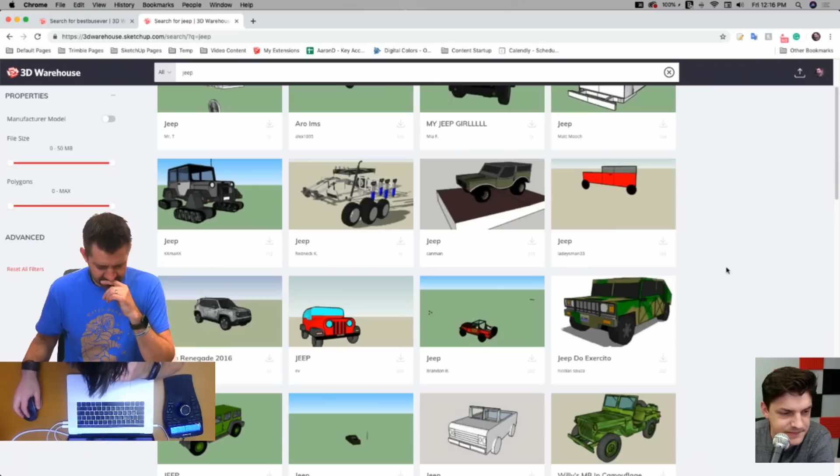But yeah, some cool stuff here - there's a Jeep with some treads on it, that's fun. And we've got this kit of additional parts here, that's pretty sweet. I'm 90% sure this is a Hummer and not a Jeep, but oh, see, the Renegade made the list. Oh, nice.

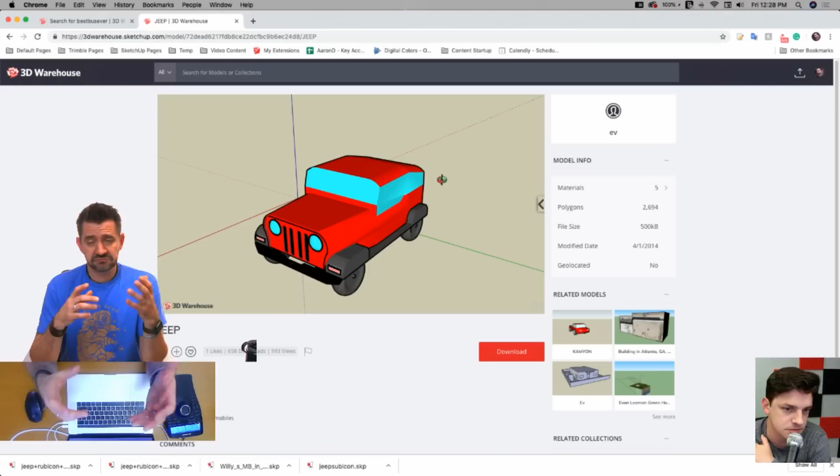A lot of times people use 3D Warehouse to house their own models and pull them in. If you're doing that, then that's great, you don't have to worry about it, go ahead and pull it in. If you don't know a model, don't take a strange model home without doing your proper investigative work. That would be irresponsible.

All right, so we're already started, Mark. Come on, man. Sorry guys, he's behind the times. Oh, I didn't even put it on the right layer. Oh man.

Sorry, I tried to make a really nice little template here that I could just use all the time, and it's not working out. Nope. All right, well let me save this as the template again. Boom, saved. All right, now that we've done that...

Let's go ahead and do File, Import. Should be that most recent file. I want to import the SKP file.

All right, so first impression, it looks like it's pretty close to proper scale, so that's a plus. That's one of the things that's hard to gauge on 3D Warehouse, because the image you first get is depending on how the model's saved. So if I was to go to File, Save right now, my 3D and upload this to 3D Warehouse...

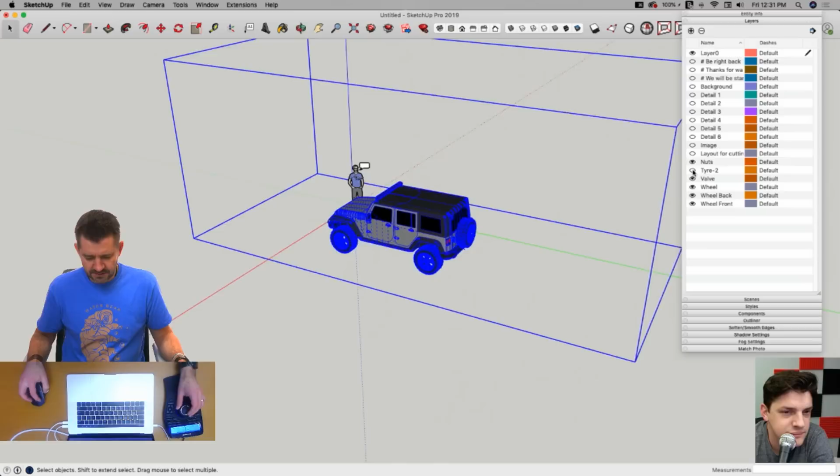But look at all these things, so we're just gonna start taking inventory here. I'm gonna turn my hidden off temporarily, and let's see what happens if I turn on tire 2. Ooh, you see that? A little girth. Oh, well, not really girth. I'm thinking maybe those are the stock tires that actually line up with, I bet these.

Well, it certainly happens when you get stuff off the warehouse. That's right, this is a perfect example of exactly what I'm talking about. All right, so here I got a thing. Gosh, so this is on layer 0. I'm just going to temporarily move it out of the way and turn on that tire 2 layer. Oh no, that's in the same group? Oh, you're killing me. I can't complain, this is why we're doing this. This is straight up like exactly why we're talking about this stuff.

So we do have some things published out there, which are guides to what's the best way to prepare a model for 3D Warehouse. We talk about things like, don't nest things 6 layers deep. All geometry should be on layer 0, everything else should be on named layers, so it's real easy to turn them off. This one already has some weird nesting going on. So this is an example of the kind of stuff you're going to run into if you use 3D Warehouse, which is good. Like I said, this is kind of what I was asking for, right?

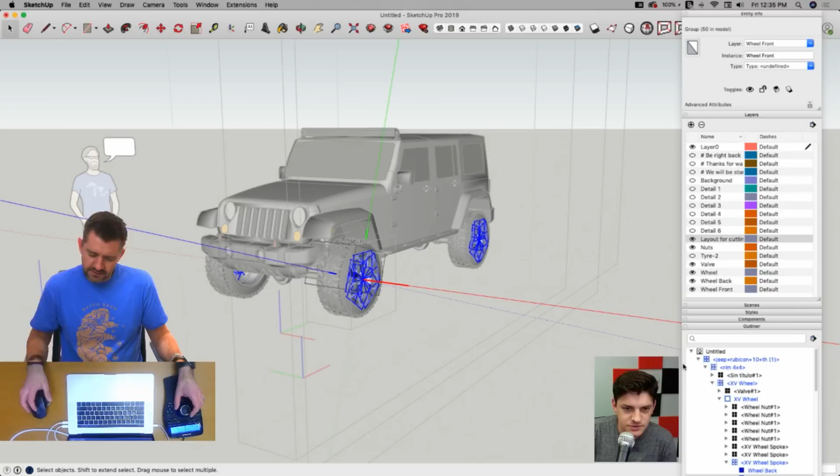Outliner is huge because it's really easy. I mean, even just right there, you saw we just jumped through so many different groups. It's just a group and a group and a group and a group. So what I can do here is when I have something selected, Outliner is going to show me, okay, this is wheel front, which is in the XV wheel spoke, which is in the XV wheel group, which is in the XV wheel group, which is in the rim 4x4. So yeah, this thing is deep.

So one of the things, at this point we're just doing evaluation, we're not even thinking about 3D printing right now. I'm just trying to find where everything is in this model. One of the things I want to think about in the back of my head is what I want to end up with is a single solid, right? I want to have one piece that is one massive solid that I can just send to a printer. When I think about doing that, I have to think about things like this.

Is this rim the amount of detail on a print? So I'm thinking this Jeep's going to be, you know, maybe that big, so that means the wheel's going to be about that big, which means this hub's going to be about this big. So when I'm going this big, how much detail do I need to put in there? Am I going to actually have these thin walls like this, or am I going to just bulk this out and leave these indents in a solid piece inside the wheel? Probably that second one. But again, still evaluating, still looking at stuff.

See what's on detail 6, detail 5, 3, 2, 1. Wow, found something. I don't want to say he varied from the drawings, but... is that a Subaru? It's not a, it's a 2013 Crosstrek.

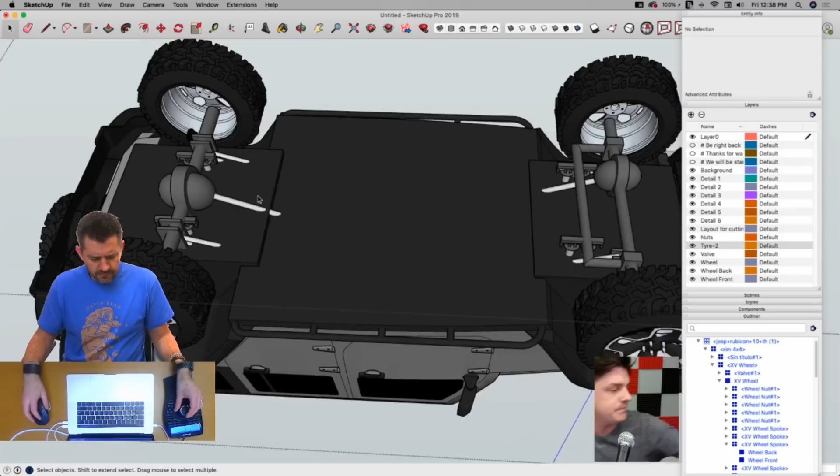All right, so we're back to this. We will have to do some work in here as far as getting the axles lined up with where the tires actually are. I'm going to say where the tires are is where I want to keep them. So we're going to grab this whole mess here and just slide it into place. Same thing in the back, we'll grab this and scoot it back. And then talk about what kind of work we got to do to make that printable.

We don't need all these layers. I feel better about the stuff we have cleaned up. I am going to take a look at my outliner though and see if I have anything that's turned off right now that I'm not seeing.

Looks like when something is hidden, so when I hide a thing, go ahead and hide this temporarily. See how it looks in my outliner? It's paler, grayed out. So if I see anything like that, then I know I want to go in there and unhide it. So as I'm coming through here, I'm seeing everything, and it looks like, for the most part, those are all the same.

Wheel nut. It looks like I'm looking at everything that's in this model right now. It's amazing how many layers and everything are dedicated to, oh, there's the lift kit. Yeah, so that was pulled off of something else also. And our actual Jeep, there's our Jeep, we found it. So the front end there is a separate one, and then the Jeep here.

That's your Jeep Wrangler Unlimited stock. Darn right it is. All right, so it's modeled as half, which is something we've talked about in here. This is a symmetric vehicle, so it was modeled in a single half. Yeah, so that's pretty sweet. Yes, we can work from this. We're gonna do some work.

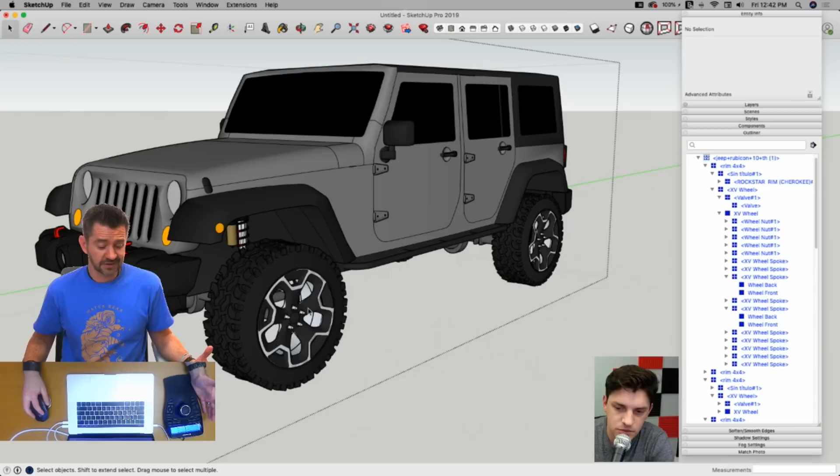Oh, for sure, yeah, I mean that absolutely. This could be broken down if I want. I could chop the Jeep into pieces and then print them as big as I could get on the bed. That's absolutely possible too, yeah for sure. I'm choosing to come up with a single solid from this disintegrated model because I want to show you guys some tips on how to do that.

But yeah, you can break down as much or as little as you want as far as that goes. All right, so what I'm going to do right now, there's a couple things with this wheel and tire that I'm going to do. I want to make it one solid piece with as much detail as I can spare, but keeping it printable.

The last thing I want to do with something like this is end up with a hollow cavity, which a wheel primarily is. It's a big hole where the brakes, wheel drum, and all that stuff go. But I don't want that. I want that to be one big solid piece. I don't want to have to come in and break out support material.

If I was printing it in pieces like you're asking, I could probably just throw this on the printer flat and let it build up underneath. That would be fine, but since I'm going for a monolithic model, I want all of this to be one piece. So I'm going to keep drilling down into this model.

If I click in deeper, the tire goes away, and now I just have this piece. In here, if I click in, okay, all of this section was made in small sections. So this is one section that's then repeated all the way around. Cool, we can work with this.

And then it looks like these guys are separate pieces. We can work with that too. And I also saw something else out here, I can delete that. I'm okay with that, I'm okay losing that level of detail. I think that was like the little error thing, right?

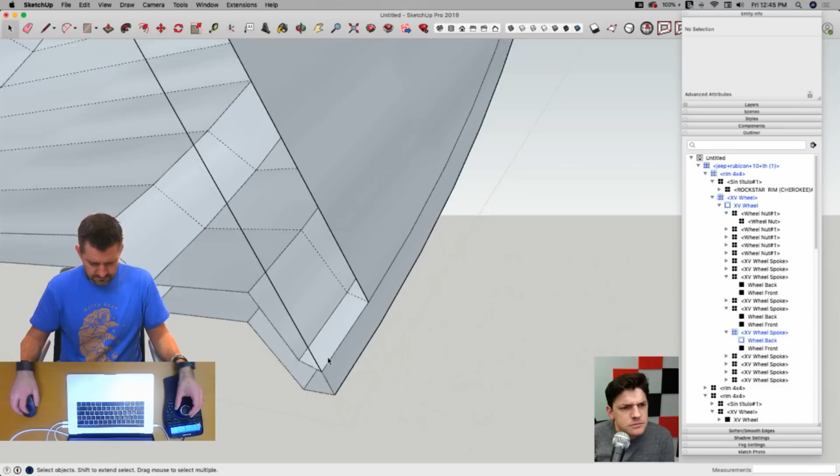I'm going to again work with what I got. I'm going to do this. Look at what's here, all right, I'm just curious. Did I misclick that? Or is that last triangle just... okay, there we go. No, something's not right.

Odd. Oh, there we go. All right, so there is, how about that? Oh yeah, oh look at that. It's so nice when things line up. It's just so pleasant, and I'm so happy about this.

I'm getting rid of the hidden geometry. You guys probably know, when you go to 3D print something, hidden doesn't matter, that basically doesn't exist is really what happens. Hidden geometry is not a thing once you get into printing. It's just geometry, just surfaces, excuse me, is the only thing we're worried about. All right, so that kind of makes...

This whole section, oh, it's connected by one line there. Oh, what's also connected? Oh, right there. I just have to do something. I'm gonna have to explode these two to join them together to get in here to close this up, because this front actually ties back in with this piece.

All right, so I want this whole wedge to just be one big closed piece. So I'm actually gonna go to the outside with this. Ooh, something else closed up. Love it. That's the circle, that thing, that's the thing. It's amazing how often the term 'thing' is the thing to say.

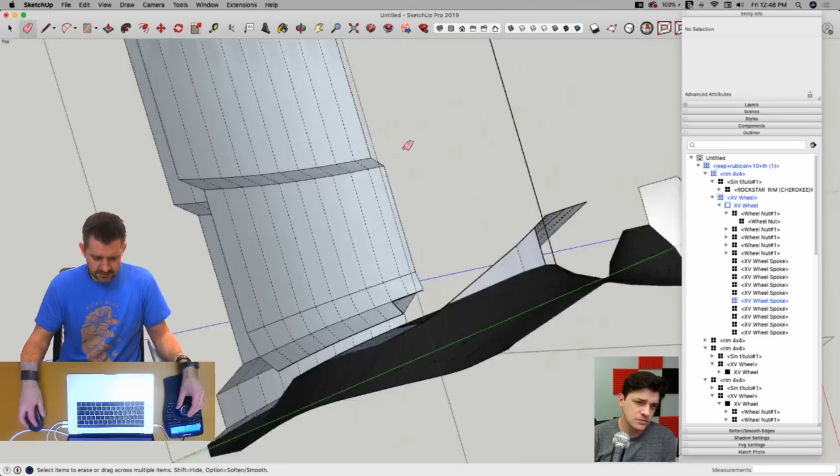Now those little lines connecting things together. All right, getting there. Right here, this big cavity, I'm going to get rid of these pieces that connect it to the back. I actually don't need this whole middle part because that's not going to exist, since that's part of the inside.

So I do want to keep this. I like this relief that goes back in here. So what I might do is pull this straight back, and then pull this parallel to this straight line back here.

I'm trying to figure out how to do some of this stuff as we go. So this is going to come back. I'm going to work plane back here. What I want this to do is go in somewhat - I don't need it to be a full cavity, I don't need it to go all the way back, but I do want a little bit of relief in there. Maybe not even that much. Maybe I'll pull that forward more, like that.

Yes, I am happy with this. Okay, this pleases me. This pleases me greatly.

All right, so I'm going to go perpendicular to this line. I'm just going to take...

Wait a minute, who hasn't told me to save yet? I'm looking, I don't see any saves anywhere in the comments. That's why I come to you guys. Okay, I'm good now.

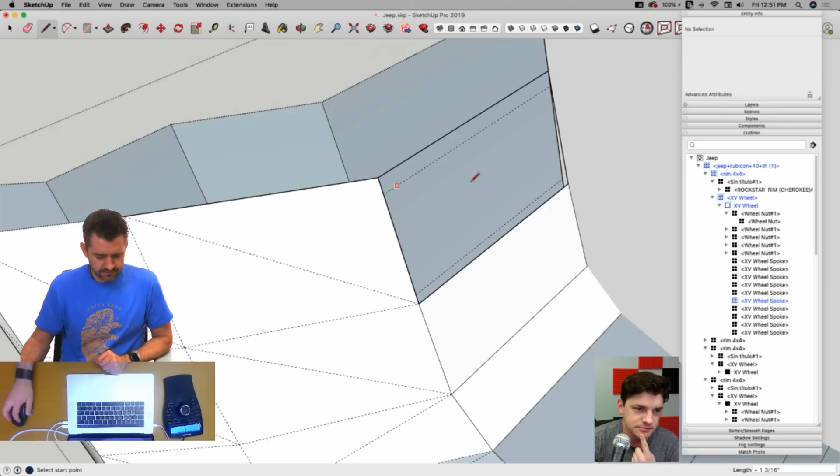and be done. It's amazing how - I don't know if it's just me, let me know if you guys have done this too - where you get into a detail and you're just beating your head against the wall trying to make something line up, trying to make something fit, and I'm like, oh, I could delete that line and redraw it, and the whole thing works again.

Couple seconds. So yeah, there's a point where you decide this is my model, and I'm not worried about staying true to the original lines. It doesn't matter, there's a point at which it just stops mattering. So get to that point as quick as possible, because it's going to save you time when you're in a situation like that where you're trying to make everything line up perfectly.

You're not worried about artist's intent, the original modeler's - you're not restoring their model, you're making it your own. I'm using their initial work as inspiration for my own final whatever. It's like a sample - exactly. Yeah, I'm respecting where it came from. I think it's awesome that whoever modeled this did this, but yeah, I'm not going to be hung up on keeping every piece of line work they had if it doesn't serve my purpose anymore.

All right, so now I'm going to run down here and just delete everything that's on the other side of this line because I don't need it.

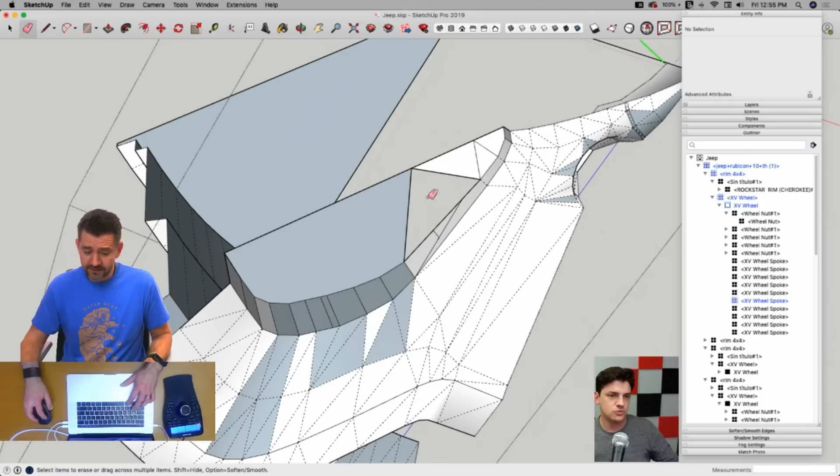All right, I'm not quite sure what's happening here. I'm gonna use vertex tools right now and make this planar. Maybe leave these lines out. No, what is? Oh, you're planar now. You can't argue with me. Oh, there we go, we're closer.

Okay, that's odd. That tells me something's broken in my geometry, most likely. But again, guess what? I'm at the point where I'm good with this. I don't care anymore. No, that sounds wrong - that's not the way it was supposed to come out. This is good enough considering this detail will be this big on my print. I don't care about getting that perfect. That is good enough.

Steven asks if reversed faces can affect geometry. Depending on what you're doing, they may or may not matter.

For this example, Aaron's preparing it for 3D printing, and the outside face and inside face will matter for printing, because if you want to have one solid that has an outside and an inside, each face has to be oriented correctly in order for that to work. Rendering is also where people run into problems with reversed faces. So sometimes it doesn't matter, but it's good modeling practice to keep whatever's inside facing inside and whatever's outside facing outside.

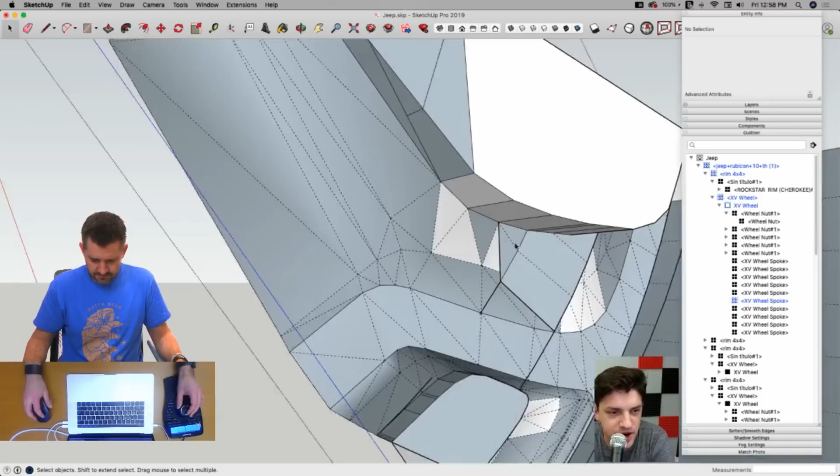Oh, speaking of - well, not speaking of - but since you're using the eraser and dragging over stuff, that skill builder you made earlier this week using the eraser as a select, that was cool. I haven't ever thought of that, but I gotta give credit - I don't know if he's on here, but forum user Mike Wazowski, aka Jack de Moel, that was his idea. We had a little thing on the forum where we asked people to tell us their skill builders, and when they did, we made them into videos.

I gotta look happy there. That one's not me. And that was one of the ones that somebody came up with, and that was cool. I mean, once you do it, it makes total sense. But it's always interesting - not going through the full process of it. It's kind of like starting to draw a line, orbiting, and selecting the endpoint. When you first start modeling, you don't really think of that. But doing stuff in the middle of an operation is clever. It is, that's good stuff.

I got hello from Russia. Hello, and Florida - hello down in Florida and over in Russia.

What are you modeling? Aaron's modeling a Jeep. What kind of Jeep is it? Wrangler something, Rubicon? Is that right? It's a Jeep, it's a Jeep, for 3D printing. So this is part of the wheel - just doing some cleanup on a model from 3D Warehouse right now, polishing up the rims.

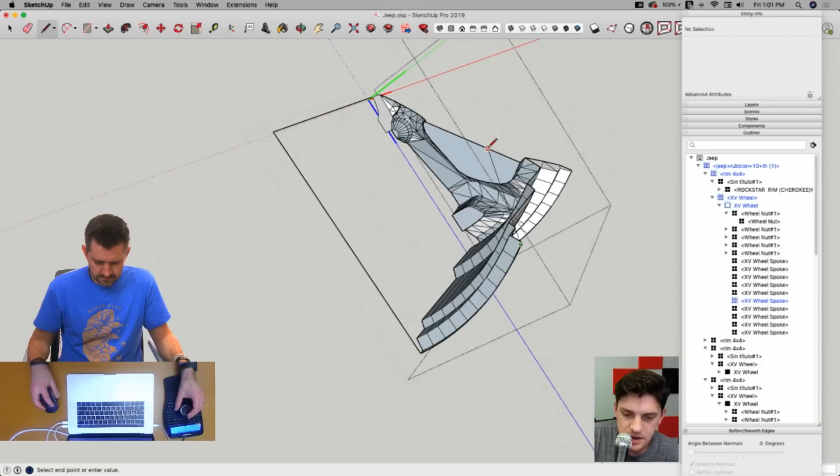And it will be 3D printed in one of the printers we have around the office. I believe the original model was modeled after reference images, at least that we know the wheels were.

So one of the things I run into a lot with models like this is stuff not drawn on axis, where models are put together with a 'that's good enough' mindset, which I get. It's fine the way it looks, but it can be difficult because once I get in here, I want stuff to line up and have everything be nice and clean, and that's not always an option. It's the back of a tire, throw it on, I could probably have that attitude too. I should probably have more of that attitude because there's gonna be a point at which we go, okay, it's good enough, I don't need to go a whole lot further to make it 3D printable. So we'll probably hit that in the not too distant future. But nice.

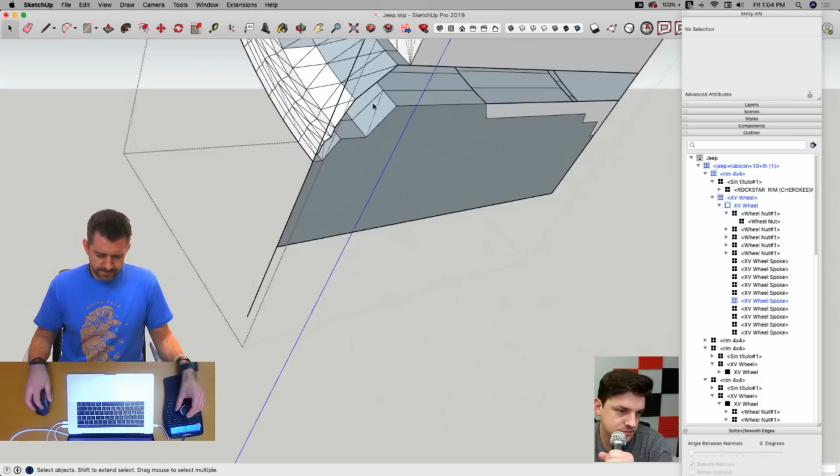I got a couple issues here where I'm just gonna do this. I spent enough time on this wheel, so I'm gonna grab some lines and just pull them through along their original axes here. Actually, I'm not pulling through on their original axes, I'm just off axes. Oh, come on man, see, that's what happens when I talk and do things. Whoa, was there two points there? There it is, so there's some stuff going on, some stuff's happening.

Maybe this was the wrong model to clean up. Well, fortunately, I think that this part of it will be... well, we're gonna see a lot of things here, we're gonna see some things. And then I'm just gonna real quickly connect these together. I thought quickly - no. So there's something going on here with these segments right here.

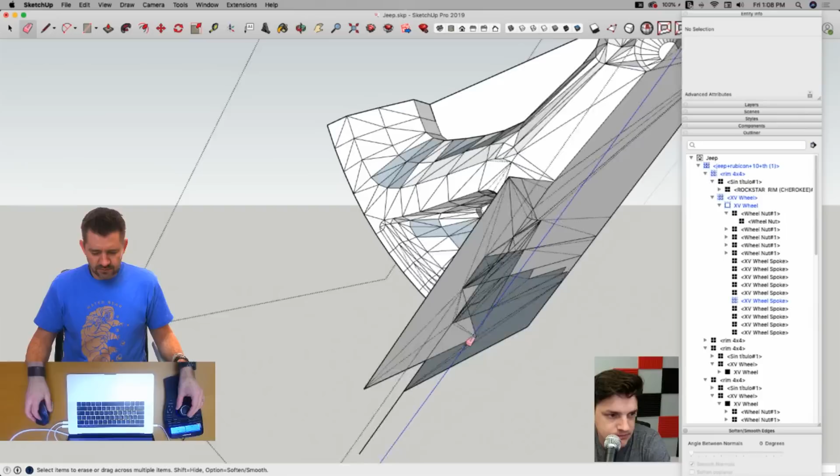Is that what you're talking about? Basically, you could think of it as this: I have a camera on my head and I'm moving around the model. When I get too close, my head pokes through the model. That's called clipping. We do experience an issue with clipping depending on how your model is put together.

If your model is too big, it can cause issues with clipping. That is to say, with an architectural model, if you have stuff miles away from the origin, it can cause issues with clipping. Or if you're dealing with a real small piece of a real big model, that can cause issues with clipping too.

So most times we see that switching between perspective and parallel helps. There's less of an issue with camera in parallel, but, and this is totally subjective, some people really like working in that perspective view. Like you. I like perspective. I struggle with parallel, but I know this about me. That's your call. How you want to do it, that's up to you.

All right, you know what? We're gonna see. I'm gonna just take these real quick, and I'm going to.

Now I'm thinking about this, I'm realizing this matters even less than I originally was thinking, because all of this is on the inside of the actual tire. So, yes, that was a fun exercise in the unnecessary.

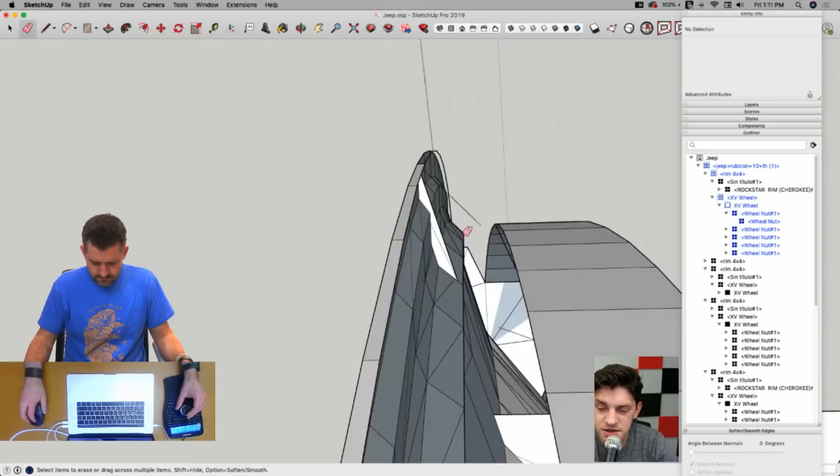I remember when I started using SketchUp a long time ago, and it's still the greatest 3D modeling software. Oh, well, thanks for saying so. I think Aaron and I would heartily agree with you. Biased, but we think our opinion's right, yeah. Yeah, we know it is.

Nicholas says, I love the 3D Connexion Space Mouse Enterprise. And so does Aaron. He's flipping around this wheel smooth as butter. And silk, for that matter.

Oh, we're almost there. Dave says your problem is that you have two eyes and binocular vision — maybe that's why you prefer the parallel. That's probably it. If only I had... what's the alternative? Eye patch? So pirates prefer parallel projection? Is that what I just learned just now? Mm-hmm, that's right, maybe.

I mean, it emulates looking through a... what are those called? You pop them out, you look at the sea, land ho, and all that. Telescope? Yeah, you're looking for a better maritime-sounding word, weren't you? Yeah. Well, para-something? I'm not known for my vocabulary. We call that wording in the business.

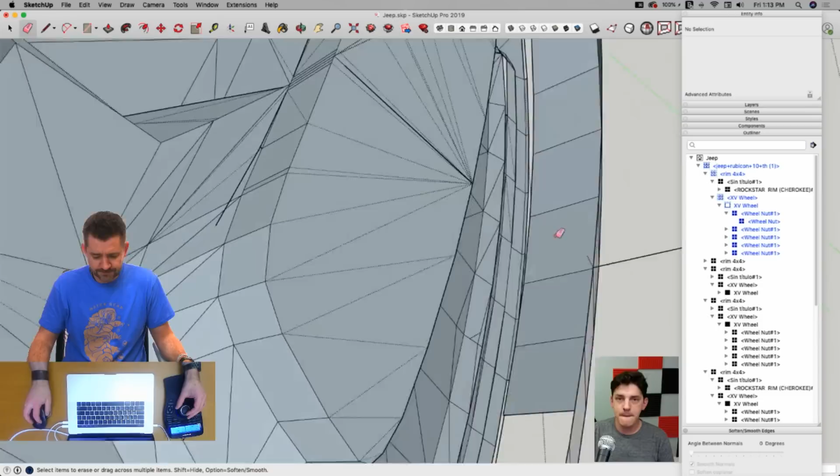And that just has to do with how SketchUp goes about putting geometry on the screen. I don't know how much there is to actually do about that.

Some of it can come down to workflow. One of the things you may want to consider at that point, if you do a lot of that, is actually making those small pieces into components that are separate from the rest of the house. You can work on those in a separate instance, open it up by itself, work on it there, and then drop it back in.

We did a video not too long ago showcasing how to take, in the one we did, an individual room and make changes to it. But same goes for taking a small piece of detail of a larger model, working on it as its own model, and then jumping back in and out. That works with components the same way. So something else to consider if you see that kind of work a lot.

All right, I think I got my hubcap fairly well isolated. It's better, looks killer, I mean, that's... All right, this is the prettiest XV wheel I've ever seen. That's saying a lot, guys.

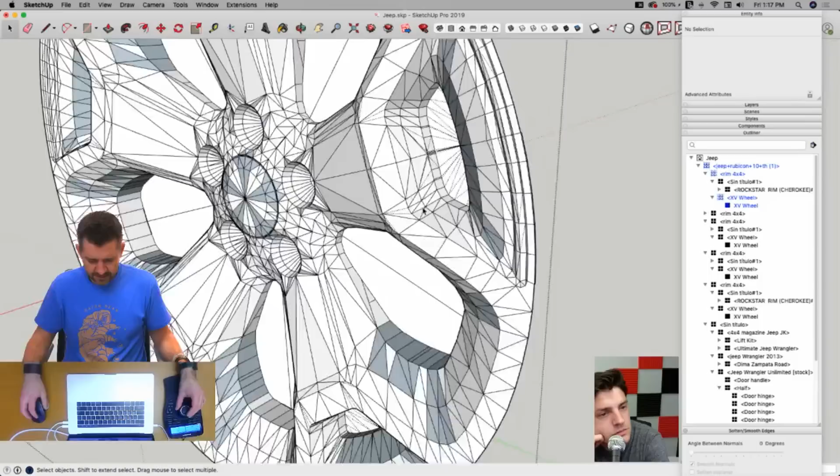What I'm going to do is step out once more. I'm actually going to go into this one. Look at what I got. Oh, look at that, it's not even attempting to be solid. Yes, let's see if I can just close this up with a line.

And this is something you run into in 3D Warehouse a lot. Oh, you know what, all of these different, I believe they're called nubbies, are separate pieces.

Oh boy, all right, so. But it's all, I don't know, I don't know what's going on here.

All right, we're going to explode that, grab all that stuff, we're in as deep as we can go. We're going to say intersect with selection. That should give me these breaks on the outside of those nubby pieces, so that'll actually intersect nicely. That looks good all through there.

Boy, now unfortunately, what I'd have to do is select each of these guys. Oh, this sucks. This is a horrible idea. Whose idea was this? Oh, man. Okay, so honestly, it's probably about... I'm going to spend a minute doing this, but, oops.

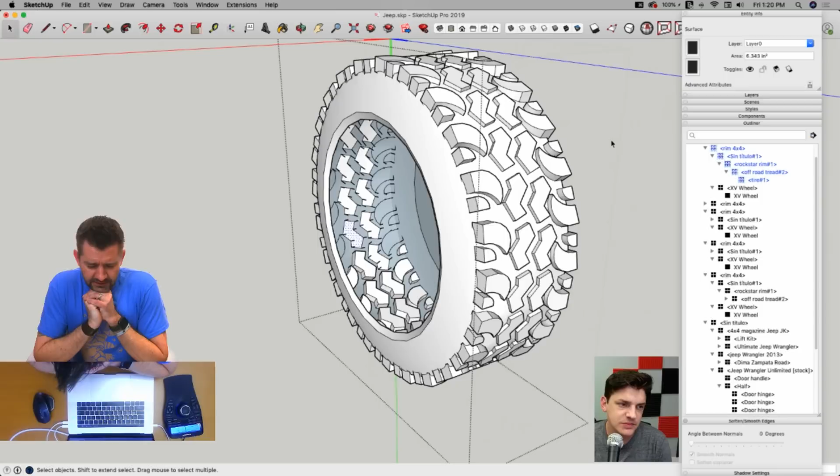Question for y'all. No, it's not a question, I'm not gonna do it. I don't want to spend... the reason I don't want to do - well, now I'm challenging myself. Somebody said you could divide it into 4 pieces, just clean a quarter of it up and then rotate that. Yeah, even less than that. That's great minds think alike.

Is there a pattern to the treads? Yeah, that's what I'm wondering. So if I look right there, that is hitting right there on that corner. So if I go here... Ooh, look at that. That looks like it lines up. Super sweet.

So I'm gonna pull this across like this, bring a line out here like that. I don't know what I just did here. Undo, undo, undo - still one of my favorite modify commands.

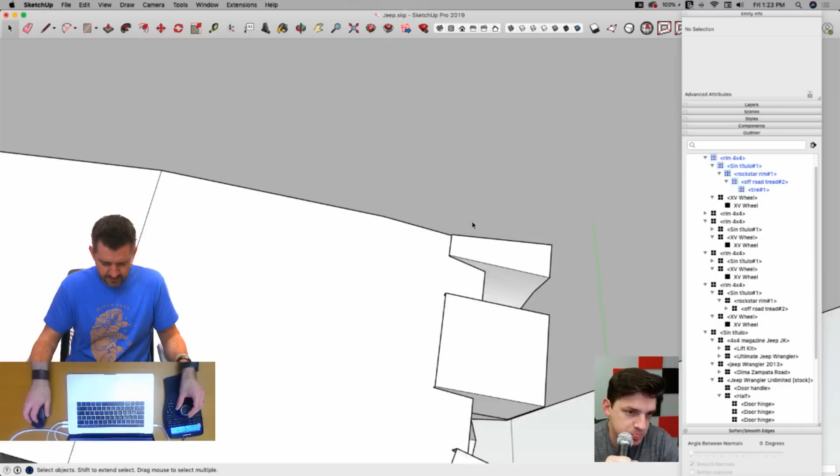Whew, that was clean. All right, so here's one of those spots where we didn't quite close up. Force that - something's not, got a line that's not closing over here.

You guys ever do this? You ever find yourself leaning closer to the screen than you can actually zoom in on? I do this. That's how I know I'm in the zone when I find myself hitting my head against the screen on occasion.

All right, that looks good. It looks like it should close. There we go. Oh, beauty, hey. Oh, look at that, it's all come together. Ah, there, we did it. That's one half. Whew, so happy right now.

Hot dog. Yes, I'll tell you what I had for lunch yesterday - a hot dog, I really did, and a hamburger, wow, not a cheeseburger, with onion and mustard, the ketchup was all gone. Sorry to hear that - that sounds like you were at a way better place yesterday than I was. I was at the Trimble Westminster office. All right, what's going on there? The agriculture division had a meeting and then a barbecue afterwards, and I was invited - I videotaped the meeting, was invited, graciously accepted to the barbecue.

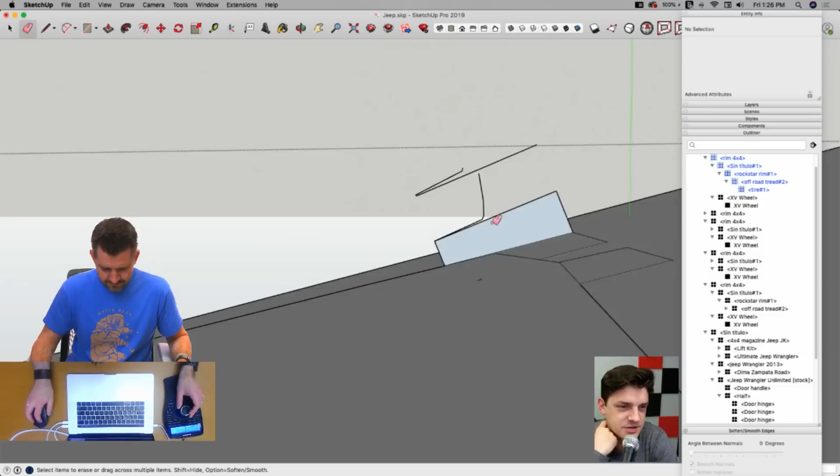Yeah, is it getting worn out? You have to get a new one? Tired, so tired. Remember those gigantic sized erasers, like for really big mistakes? You ever seen those? Yeah, that was quality humor, I don't care what you say. And the big pencils are very funny too. I remember one time my friend broke his wrist, and he used one of those big pencils, and he said it's the only pencil he could write with. That sounds rough, not fun. Yeah, you have to sharpen it with a knife. Not a lot of classrooms have big pencil erasers or big sharpeners.

Have you ever heard of Stabby CAD? Stabby CAD, STABI. Oh yeah, I think I have, I heard someone mention it yesterday in some computer-assisted design context. But I wonder if they have the extra large sharpeners at their office. Can't have stabby hands without a stabby hand. Stabby hands, stabby hands, stabby hands.

All right, I do lean in on the screen, and then I get very angry with myself because I have neck and shoulders like stones. My neck hurts big time, all the time. Stone shoulders and neck, that's a good way of putting it. All right, we did it, I can lean back again. Break those stones up, baby. That's right, crunch, there's definitely crunching noises happening.

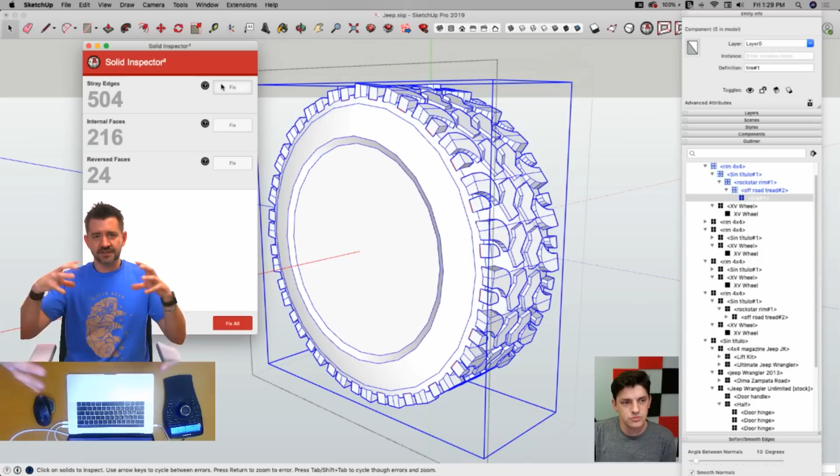I am going to exit out one, grab that group, and run Solid Inspector on it right now. We haven't used Solid Inspector yet, but it's essential. This is why I have a shortcut key assigned to it, or I did, I think I unassigned it because I ran out of room on my shortcuts. But if you're doing this kind of work, Solid Inspector is something you run over and over again as you work, because each level of group we come out to, we want to make sure we're building solid. Then I'm going to grab the hubcap, slap it on here, make sure it's solid, and keep working my way back out to make sure everything is solid.

This got a bunch of options, some stray edges inside. I totally believe that, some internal faces and some reverse faces. I'm just going to say fix all, see what happens. Solid Inspector's happy, yay, SketchUp's happy, it's calling it solid. And of course, don't forget to save.

All right, that looks good, I'm happy with that. So where am I right now? Look how many layers deep this group is. This is the group that actually has the geometry, it's tire number 1. It is in 1, 2, 3, 4, 5 different levels. I don't need 5 levels of wrapper right now. So what I'm going to do is at the second lowest level, I'm going to explode. I'm going to step out another level, and explode again.

All right, so when I come out another level, here's where my two groups are finally meeting. You can see that's inside of another level. Nope, that's the master level, and I'm in here right now with these two. So I'm out now. That's good, I'm in a good place now.

All right, so I'm going to look at this. I'm going to scoot this out temporarily. I'm going to grab this, and oh man, explode again. So much exploding. I'm going to get rid of this face right here. Step back out, grab this, and slide it back.

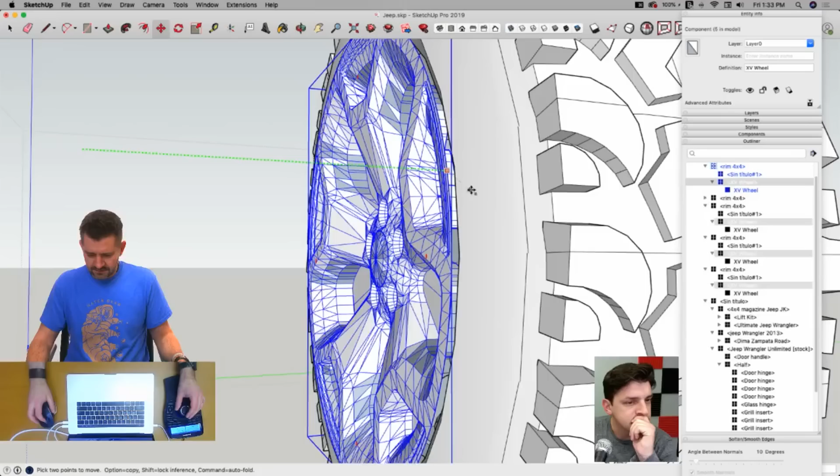And this is an issue that comes up a lot, you guys have probably seen this. Can't quite see where I'm snapping to, and this is where X-ray comes in. I want to snap this into my surface and see it. So that's hitting the face of the tire.

This is an issue that happens all the time, 3D warehouse or not. This hub was made with a different number of segments, it looks like, than the wheel was, so I don't have a clear connection. I don't have just circle slots in a circle where we're good to go. This has more sides than the wheel was made with, so I get this thing where here's my faceted edges of my hub, and here's the big facets of my wheel.

There's not a simple fix for that. I can't just go bump or reduce one or the other. So what I'm going to do in this case is push it back in just enough so that it overlaps completely over the geometry of the hub. See that? Now that's done, so if I look inside here from the back, see that overlap right there? That's what I need, these two pieces overlap each other.

Now I'm going to grab both of them and explode them. Oh, and I got to explode the hub twice because that's still two layers deep. All right, now I'm going to grab everything and right click.

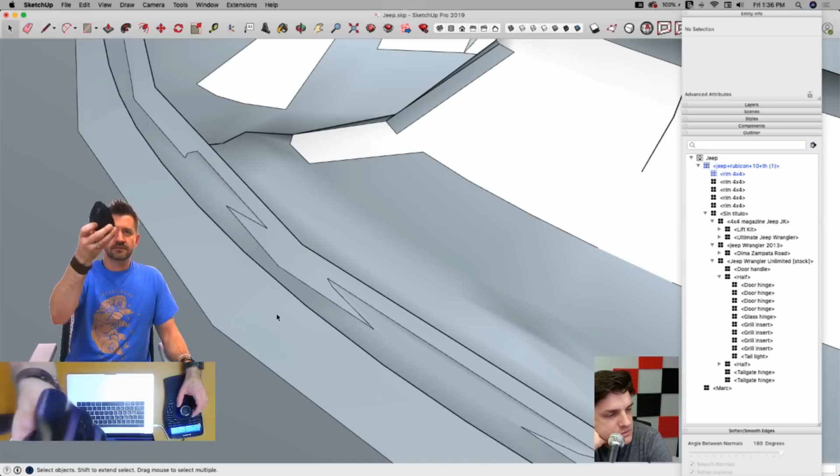Logitech MX Master - the reason I like this is because it has so many programmable buttons. It's got several buttons under the thumb, a couple scroll wheels, and there's actually a button on the thumb pad I can use to assign gestures. My most commonly used drawing commands are activated through my mouse, not through the 3D mouse or shortcuts. I'd recommend spending a bit more money - they're about $100, but you can get them on Amazon for like 60-70. It's worth it, especially if you spend a lot of time. It's a little heavier, a little bigger. Some mice make me scrunch my hand up, getting claw hands to use them, but this fits in my hand pretty well.

It's got Darkfield technology, I think they call it, so this will actually work on a piece of glass, which is pretty cool. I've only had one time where I went to a client to do a demo and they had straight up just a bunch of glass conference tables - everything was glass. Hopefully no stones being thrown.

Shell Raider says, much clickies on the MX Master there. Yes. Do you have assigned shortcuts on the extra buttons on that mouse? It sounds like you do for drawing commands, and also for the 3D mouse - you have shortcuts assigned to those buttons as well, right? Yep, lots of shortcuts.

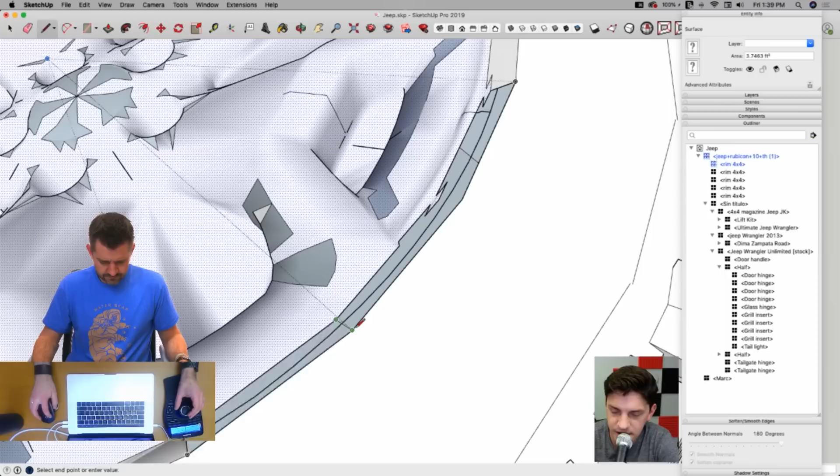Arthur over on Facebook says, I find using both endpoints and profiles very helpful when doing this type of cleaning. Besides slowing things down a little, what's your thought about using endpoints and profiles for this kind of cleaning?

I personally am not a huge fan, but I would say you're right, there are certain situations where it does save time. I don't personally love how it looks and I get caught up with that sometimes, so that's just me. I know some people love having their endpoints on at all times - that's cool, but that falls into to each his own. Profiles are a big thing though, I do keep profiles on quite a bit. Endpoints, I just struggle with endpoints.

All right, just for fun, I'm going to run Solid Inspector. Oh, it's not so bad - get some stray edges out of there. The reason I'm not terribly excited about cleaning this up is because I think there's a lot of things like this where, look at this thing right here, so what I would have to do is find each of these, do that, and then that's one less problem to fix.

Yeah, I'm not sure that I'm gonna - we may just simplify this hub a wee bit. Yeah, I think that's worthy. I'm gonna undo a few times.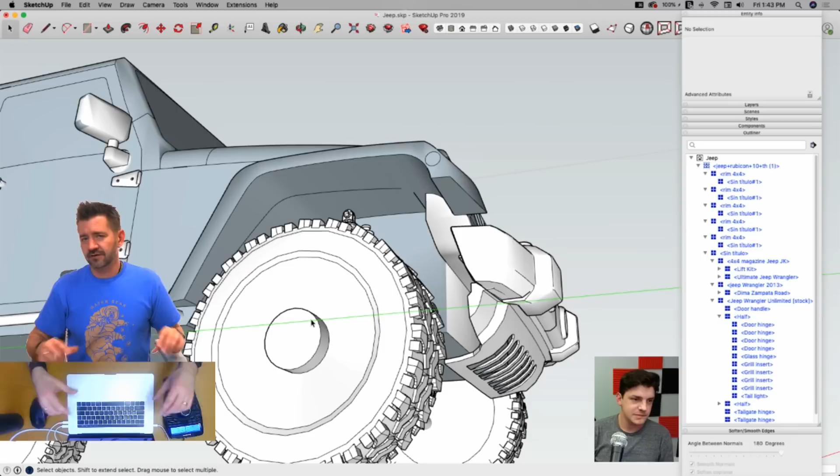That hub was the segments that were repeated around, but weren't actually connecting. So the pieces, when they connected, at every intersection there was a little bit of a gap. Again, could have been fixed. What I would probably do is go back to the original downloaded model and re-extend all those surfaces so they hit and actually intersected. Then, just like I did on the wheel, make a segment, make a new section, and repeat it around. Because what's in there was not something we could have saved very easily.

Speaking of saving, that was a segue, nice. I'm gonna go ahead and let it fix.

What is the manipulator in your left hand? That is the 3D Connexion SpaceMouse Enterprise. If you look in the YouTube description, there's a link to it. Not necessary for SketchUp modeling, but it just makes the orbiting a little bit smoother.

Who is your favorite Ninja Turtle? Leonardo. I have to agree, always been my favorite, he's the leader, he's got swords. Yeah, swords are cool. The thing that's always got me about the Ninja Turtles is two of them basically had sticks, right? Michelangelo and Donatello basically had sticks, so they hit stuff with the sticks. And the other two had sharp, pokey instruments of metal. Yet nobody ever got cut. I mean, when they're fighting a human being, they would run over and slice a pole down, which would fall on them, granted it was a kid's show. Not originally though, you guys ever seen the original comic? It was not family friendly necessarily. I don't believe I've seen it. I'm most familiar with the film adaptation, and not even the first one, the second one, Secret of the Ooze, that's the one I'm most familiar with. Hey, I will say this about that, some cool practical effects, full body awesomeness. I like Tokka and Rahzar or whatever their names were. Yeah, guys in big suits.

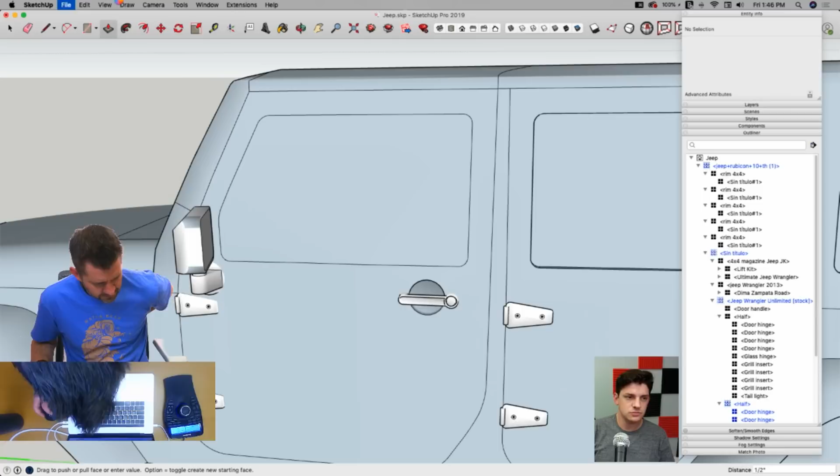These ones right here, of course, are gonna be an issue. So this is where I'm gonna save, because I had an issue with this previously. But I'm gonna go turn on joint push pull and use standard push pull to grab this surface and push it in. Oops, I want to push it in, not make a copy. Push it in a half. And that did break some geometry, but I'm still doing good.

All right, now we got what looks like windows. Nice, yeah, you gotta be able to see out. You don't want just solid metal on the outside of your Jeep.

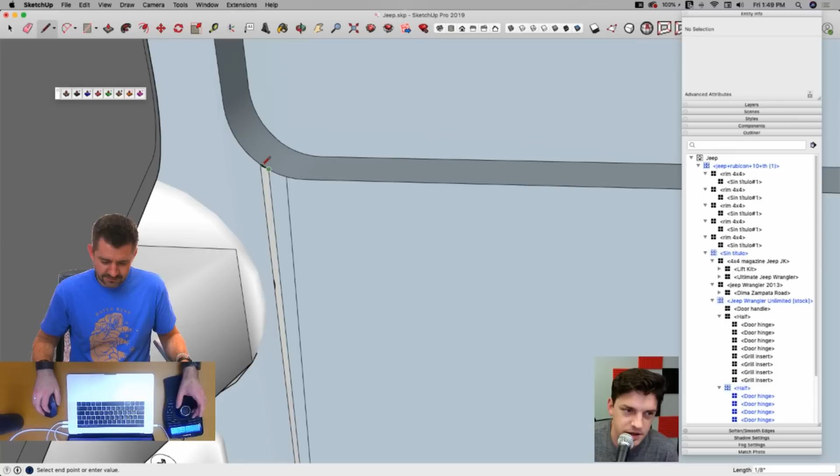I think this is related back to the Ninja Turtle thing. Woody from Toy Story does not have a gun in his holster, similar to the not cutting human beings, but rather cutting telephone poles. But if you remember, he does get a match stuck in there, which is an issue too - that could even be more dangerous than a tiny little toy gun. That's true, but yes, that is a good point.

Whoa, so here's an interesting thing. Look at this little tiny offset. Sometimes I wonder how stuff happens, it's so small. I'm just gonna get rid of it. There's a little tiny edge right there.

I think this is referring to the pirate ship. That boat was not so complete. Yeah, well, usually these modeling sessions, we kind of just model what we can in the time allotted, and I believe that was no exception to that rule. But I'm sure there are some kind of tutorials or people modeling boats elsewhere on the internet. And if there's enough people who want to see more in-depth boating, boatage, session, perhaps we will do that.

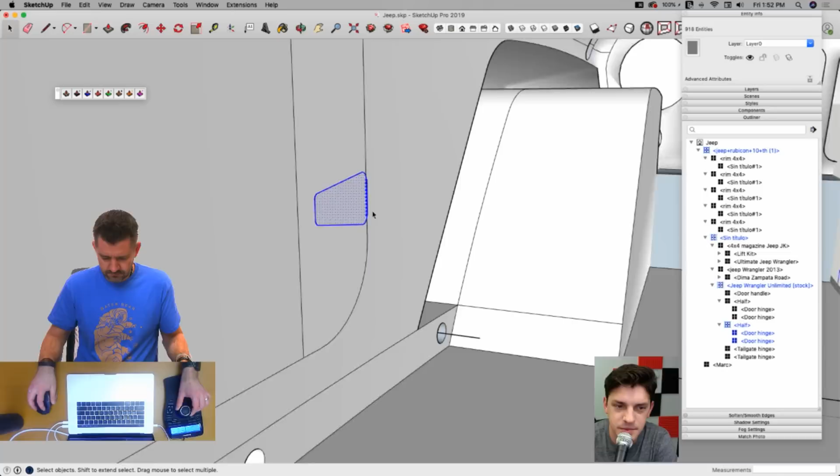So laptops for rendering or desktops? As with most computer stuff, I feel like you can get a lot more for your money on the desktop, it's just the laptop can easily be brought around places. And then, yeah, I got another suggestion - use the desktop, definitely get more for your money, bang for your buck as some folks might put it, on the desktop version. Yeah, that's most people I know who do a lot of rendering have a desktop, but that depends on your workflow - not your weekend fro, your work fro. To and fro, and working fro. Okay.

We do have - I have talked to people who, again, they render on a desktop, and they'll have a fairly lightweight laptop that they use just to show people models or renders or work that they've done, so it doesn't really even have to carry much load at all. So that's also an option, some people go that direction.

All right, oop, a couple more. Right here, all this - intersect faces with selection, and we're just, each one of these, I'm just doing pretty much the same thing. Oh, something didn't break there.

Oh, we got geometry against geometry. Sometimes when this happens, geometry won't quite break because I actually have overlapping - it's kind of like a figure 8. So I can break that off and I can get rid of that. Now I might be able to come back in and force this to break separate too, and get rid of that. Just be aware of that when you have that connecting geometry, it doesn't always find the break properly.

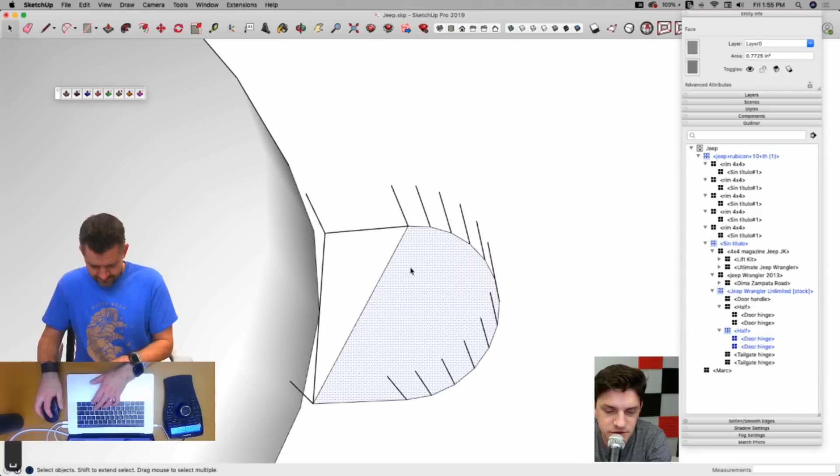V-Ray or Lumion, Twin Motion? Usually for renderers we say whatever works for you. Certain ones will give you more control, like V-Ray, or Lumion is a little bit easier to use. So it kind of just depends on what you're comfortable with, what outcome you're looking to get, and what you're looking to put into it.

I've never heard of Twin Motion before, by the way. Are you familiar with that? I believe it's a renderer that was purchased by V-Ray, unless I'm mistaken. Oh, is it Unreal? Who bought Twin Motion? Let me look it up... it says Unreal Engine Twin Motion. Somebody bought Twin Motion recently.

All right, I'm backing it up here. I do not know what's happening with this thing, but I'm cutting it off. I reached that point where I'm gonna stop trying to fix things and I'm replacing them. Talked about that earlier - the time is now.

There we go, I'm gonna chop that handle off. The nice thing is I'm working on a component, so I only have to do this once. Well, I guess I have a back handle too. Dang it.

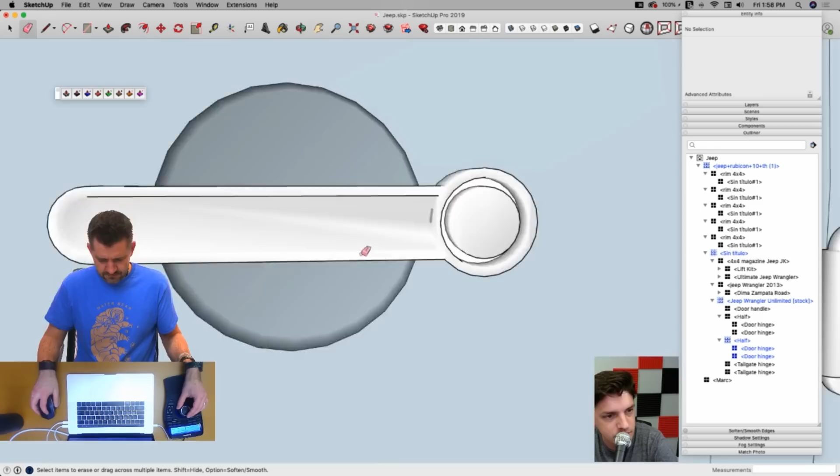And again, not worried about loose geometry because cleanup will take care of that in a little bit. Why is this - what if this is an important part? That's where you put the key in. Well, I just disappeared it. Keyless entry? Cool.

Twin Motion was purchased by Unreal Engine and it's free until November 2019. Has anybody out there used Twin Motion? I haven't actually ever had a chance to try it out. I'm curious what anybody thinks of it.

So is it like a real-time renderer? I don't think it's real-time, I believe it's just a traditional rendering engine - correct me if I'm mistaken. Well, this is based on Unreal. Is that just a now thing, or has it always been? I don't know, this person says it's great and light. It says yeah, it's real time, and also a no-brainer if you don't want to spend money on rendering. Free's a great price. Can't argue with that.

Do you think you can earn some extra bucks doing 3D modeling for selling online? Depending on quality and the type of models, of course, but is it worth it? I personally couldn't do that, I don't know how to model, but I'm sure there's some website out there you can sell your models to. I've heard of people putting their stuff up on Turbo Squid or similar sites. I think that falls solidly into: if you enjoy doing it and can create quality, it's a great thing to do. If you don't like 3D modeling, I would not recommend it. But I know some people out there do actually make money off of that, so it is a possibility.

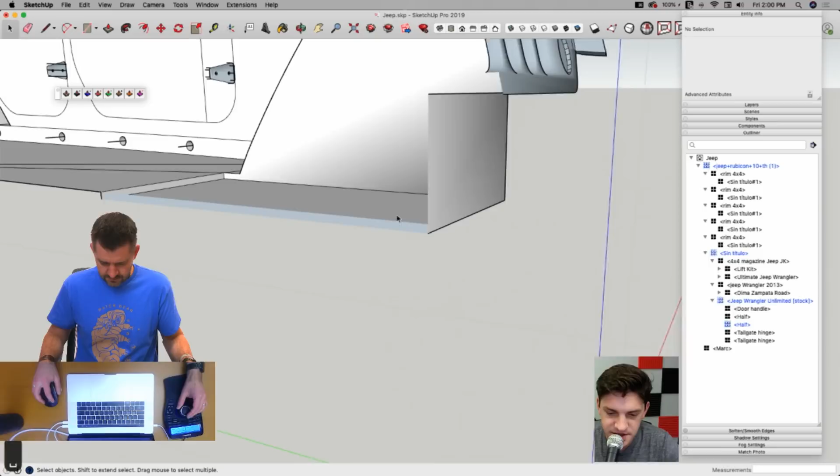3D Warehouse needs a sell/buy modeling section. Yeah, that's an interesting thought. I know we have some manufacturers with their own models on there of specific products and stuff. It's still free, but at least that's like an official type of model - good-looking models from the actual manufacturer.

Please, I need help printing my SketchUp model in layout. Do we have a specific how-to for printing with Layout, like a Skill Builder? There's a bunch of different videos out there - I'd recommend going to our YouTube channel and searching for the term 'layout,' there's stuff available.

Sketchucation has a store for SketchUp models, check that one out - yeah, peep it. And then they say, never make 3D Warehouse paid. Yeah, okay, I call it 3D Warehouse, you know what I mean? Boom.

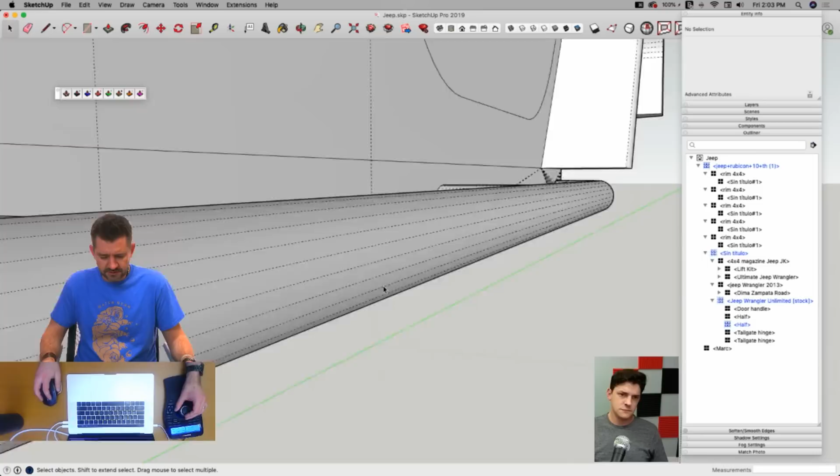So there's a couple things you could do here. One is to turn on hidden geometry, and I can come through and individually reverse these faces. That would work, but could be time consuming. You can also try reversing one of the faces, like that one big face I just reversed, and then try orienting faces again. Sometimes that's enough to kick it and make it pay attention.

The other thing is to not stress about it too much until you get to the point where you're dealing with a solid. Right now I don't have a solid, obviously, I just have a big chunk missing.

So what I might do is grab these two halves, make them a group, go into that group and explode the components. And that should merge that together. Now I got a little gap tooth grin right there. Let's close that up.

There we go, and I'm just going to walk down this seam line right here. Oops, there we go, look at that. See if there's any other gaps where I welded it together down the middle. Woo! Turn it upside down - it's like watching a fancy movie.

All right, so that all looks good. I'm going to go ahead and run Solid Inspector right now. Of course, there's a nested instance. All right, we're inside now. Now what you got - there's a couple issues.

Not terrible. All right, so I'm going to get rid of the stray edges - that's fine, that's an easy one. Two face holes, go ahead and fix that.

Now, this can be a little scarier than it needs to be. You see these big numbers like 384 - you have to remember that a circle of 24 sides is actually 24 edges that could have an issue. So this 384, I might be able to fix by closing a hole or two. If I had a long strip where two pieces of geometry are supposed to join together but didn't, that could be like 200 unconnected edges.

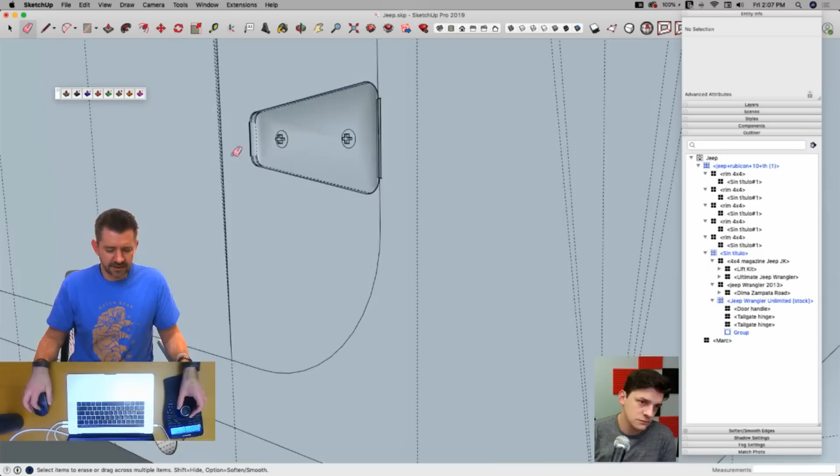What I could have done, something else I could have done, coulda woulda shoulda, is I could have actually closed up that one half and run Solid Inspector on it to find any of my problems before I repeat it. That way I wouldn't have to go through and delete this geometry twice, once on either side.

Making a paid section would add incentive for people to make higher quality models to sell. Some people would rather buy something than have to fix it, like in this video. Yeah, I think there are a bunch of platforms out there that are paid and have high quality, curated models and stuff like that. I think the good thing about 3D Warehouse is that anybody can create and download stuff from there, so there's definitely a lot of stuff. You might have to do a little searching for exactly what you're looking for, but there are a whole bunch of models up there.

Let's see. Twinmotion is a standalone app that allows you to import your SketchUp model. It's not real-time between SketchUp and Twinmotion, and it's a heavily biased rendering engine that's a bit on the cartoonish side.

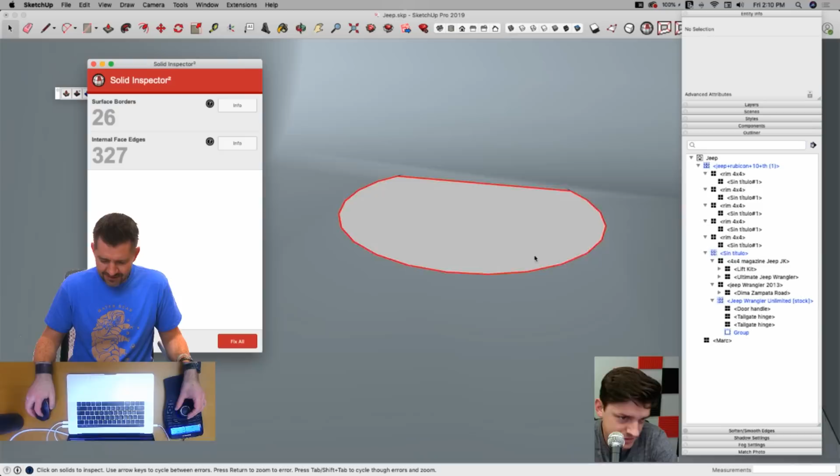Just wrecking ball and hop back at it. Alright, so I'm still seeing this big number without seeing it. Oh, look at that, same place. This is probably telling. Yikes, same place that I have my front back issue. I also got a solid issue, I have issues with my solidity. So we're gonna hop in there in just a second, take a look right here and see what my problem is.

All right, yeah, that's an issue. Funky, let's see if that's actually a separate face. Delete, that's easy. Now what I think, yeah, it didn't get pushed all the way through. All right, delete, delete, delete. Just hop over here real quick.

Somebody asked about this, again this is not the 3D mouse channel, but one of the things I do like about the 3D mouse is this, being able to real quick and easy hop inside of a model. That's definitely easier to do with the 3D mouse, so there are advantages. Traditionally with the scroll wheel it's slow, you zoom down, phase through, then go to the next surface to jump inside. Now I'm inside of it. It's based on how far away your cursor is to something, that's how fast it'll zoom. And if you're not right up next to something, it doesn't work as well.

That kind of falls into what is this? That looks like the wall in here. That's the checkerboard. So if I look through here where I'm having all these problems, look at this.

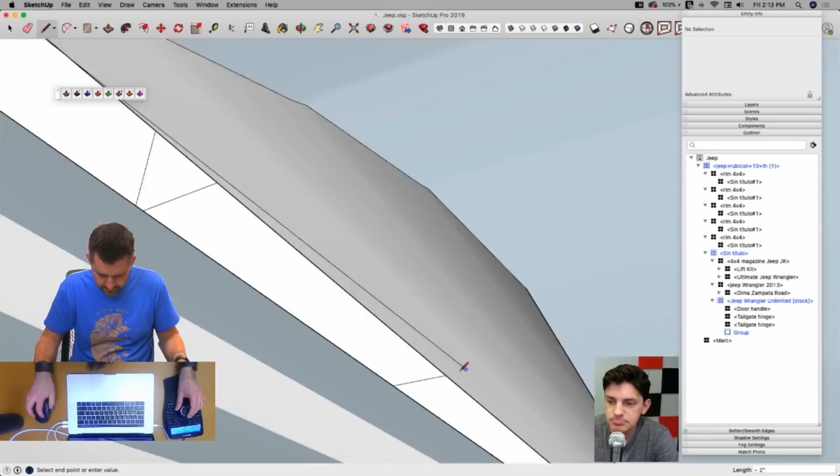So there's also a point at which you look at things and go, maybe it'd be easier to re-import that last file. Oh, there we go, that's gonna make it a little easier. That's not so bad, never mind, I was making that more difficult than I needed to.

That closed up all right. So we do the same thing here, top down here.

Oops, there we go. Ah, you know what, component editing strikes again because... oh, you gotta do the other side too. Are you sure that thing's on both sides? Maybe you can just delete it on one side. Believe that, that was more than half of my errors.

So, and I bet, check this out, let's right click here, go out here, orient my faces. Orient faces. All right, there we go, it's all same color.

Actually, I'm wondering if I could do this easier by deleting this piece right here and then pushing this through, and then cleaning it up afterwards. I'll show what I'm doing in just one sec.

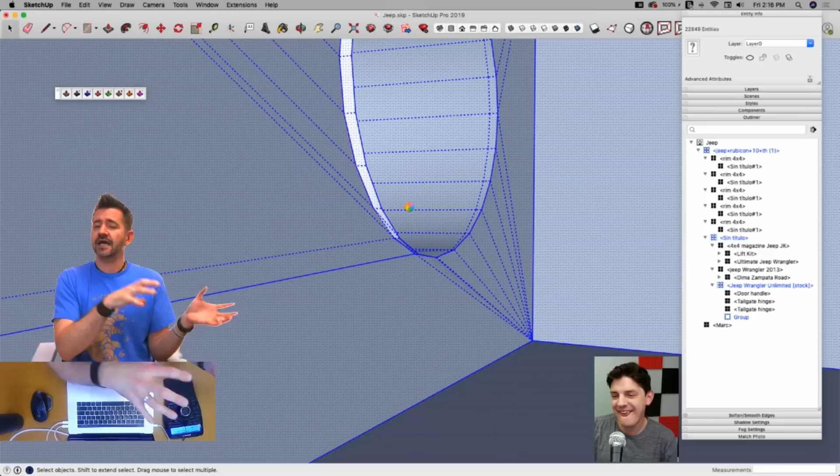That may take a second longer than I was thinking. But yeah, we're actually really close. All we had to do is take the suspension, move it where it's supposed to be, because if you guys remember, it didn't quite line up with the tires -- by didn't quite, I mean didn't line up at all. Put it where it's supposed to be, which is good because it's actually its own separate component. So put it where it needs to be, and then intersect that with the bottom. Fortunately, everything in that bottom section just runs into the bottom, a flat plane on the bottom of the body. So that's gonna be real easy to intersect and clean up. And then intersect that, the axles, with the tires, and we will have something that is solid-ish.

This may be our break. It's time to take a break. Can't believe I selected everything. Oh, there we go, okay, it's back. Oh, all right, let's see.

And this got a little funky up here, but all right, cleaning up okay. Not sure what this...

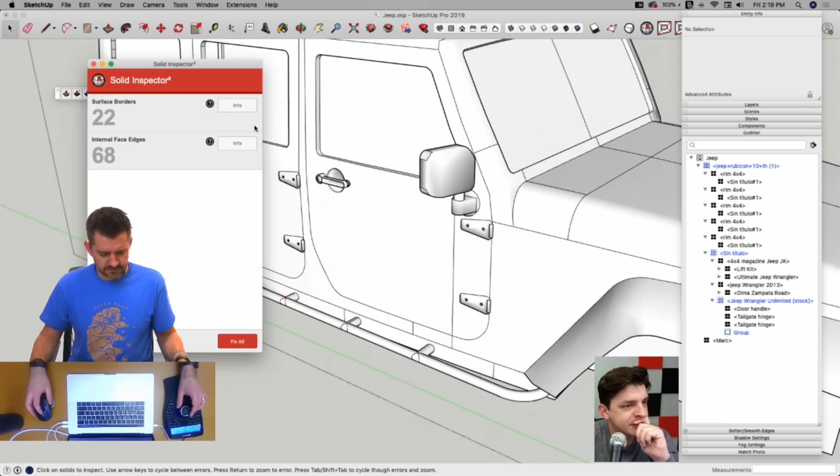I don't even know where they are. I can't -- oh, there we go. Whoops, how did I do that? That was probably me, well, unless one of you guys did that. Very funny.

Every once in a while, when I get into more complex meshes like this, you get an extra face that shows up when you close a mesh. I'm not sure what causes it, and I can never duplicate it intentionally, but every once in a while I'll see that.

All right, how's that looking? We're close, guys, we are real close. Oh, here's one of them. So something happened where I changed geometry and it ended up creating, I have my big surface and then an extra surface on top. You can tell if you pick the big mesh, see the difference between those two?

Let's go on the outside, it'll be easier to see. But usually I can just select that and delete it, and whatever it is, it's pretty easy to heal back up.

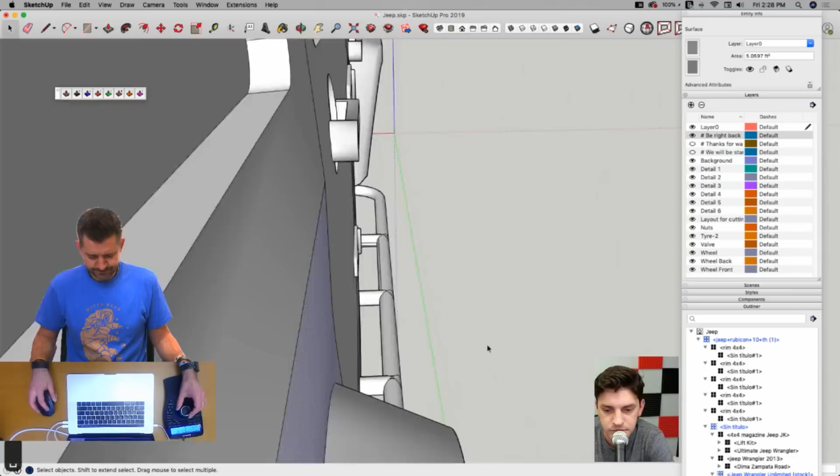Real quick, looks like somebody asked, are the wheels hidden on another layer? They're not on a separate layer, they're actually a separate component. So when I click into this component, everything else goes away, because I'm hiding the rest of the model right now. I've got hide rest of model turned on, so that's where they are.

Not quite sure what's going on. Oh, I think these are surfaces in here, so delete, delete. Oh, there's more, it's actually there we go. Nope, don't do that, not quite sure what's happening up here. Oh, there we go. Okay, how about now?

Ugh, it's always these little tiny details that end up causing issues too. And again, like I was saying before, this is no fault of the person who made this model. They never created this with the intention of having it 3D printed, so I can't say it was poorly modeled or anything like that, I wouldn't put that on it. But this is the little things that end up catching you and causing you to have to run back and clean things up.

All right, we're almost there, and I will keep saying that. So this might be an extra surface, if I delete that, it's still there. Probably the same thing here, select that surface, delete it. I'm gonna, nope, don't have one down there. All right.

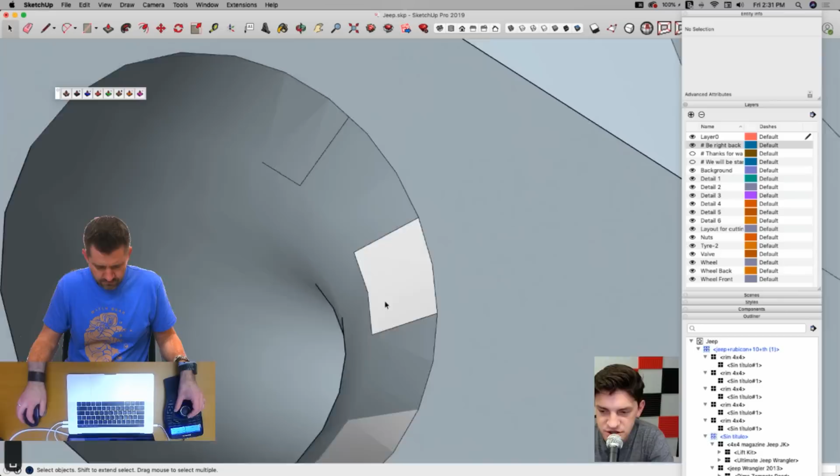Hey man, how did you set it up to hide what's not selected when the tires went away? That's a function of hide rest of model, which is under the view menu, view component edit. You can either hide similar components, or if you're inside of a container, a group or component, it'll hide everything outside of that, so you're just looking at the wrapper or container that you're currently inside of.

And the 3D mouse, yes. A lot of 3D mouse talk this time. So it's the 3Dconnexion SpaceMouse Enterprise. In the YouTube description it says Aaron's mouse, and there's a link there. You can click on that, go to the website, and see the description of it. But yeah, that's the one, Space Mouse Enterprise.

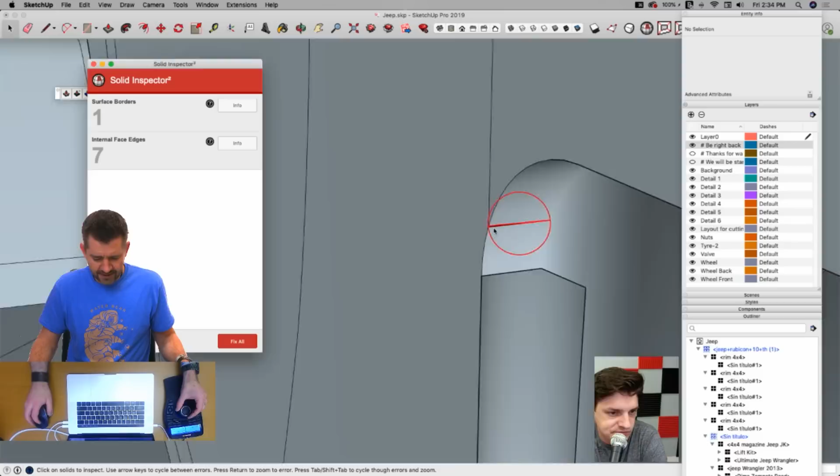Yeah, if you're trying to make it a manifold thing for printing. Is that the workflow you'd suggest - get it as close to a solid as you can? Because if you're modeling, you know some of the stuff you're gonna have to do - there's holes in it, there's a bunch of stuff you're gonna have to do. I don't bother with Solid Inspector till I'm past that point, where I know these pieces need to be. I need a back on the tire. That stuff happens first.

Ooh, look, 3 fixed reverse faces, and everything's solid. Print it.

Select it. And it's a group. Select it all, I'm just gonna do a quick soften. They look nice - too much, bring it down.

So this is the thing I was looking at before. I'm kind of okay with the doors not showing up, but I really wanted the windows at least to get pressed in there a little bit. So that's what it will print like.

If you do something like this and you want to - seams are something that comes up a lot. So if you want to print something solid that has a seam in it, you have to think about the scale of that seam. To print a noticeable seam between two pieces, you're going to need at least a 32nd of an inch, maybe a 16th of an inch, a little bit of a gap. That ends up being a fairly big chunk of this if this whole thing is only 3 inches long. So that's your call - I'm not going to bother with messing with that. I'm good with this level of detail for the model I'm doing.

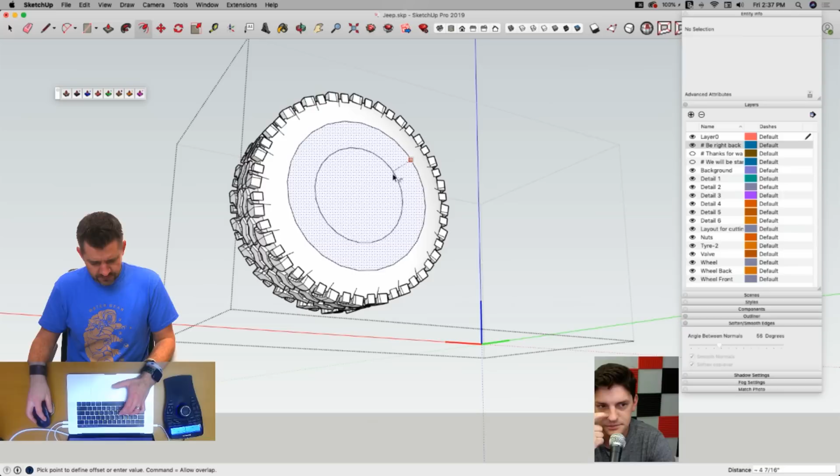I want to get this - see, now this is where I start thinking about what do I actually want to put in here. This is a bunch of little tiny pieces. This thing right here is not going to print. If the bottom of my Jeep is this wide, we're talking about something that's like a string of filament right here - this is like the width of one pass. So I probably wouldn't even worry about that. I also don't think you're losing too much integrity of the Jeep model design. Yeah, I don't know how true to life the offset differential is on that. I'm scrapping it, I'm pulling it, and what I'm going to do instead is come in here and offset and pull this out. I'm just arbitrarily pulling it out right now because I want to see what that looks like.

Okay, I think that we could make something along those lines work. You may have noticed they don't quite line up, so I'm going to grab this one and pull it horizontally until it lines up with that one.

Same thing here. I'm going to pull this one forward from here to here. All right, that looks better.

Something I did just do, because these are components, I just shot a stick basically right into the back of the Jeep, which is fine because this is what will actually connect that up. I have to decide if that's enough of a connection. I don't think it is, though.

What I'll probably do instead is go right about here, drop straight down, come over, go across to here, pull that across. So I'll create something like this.

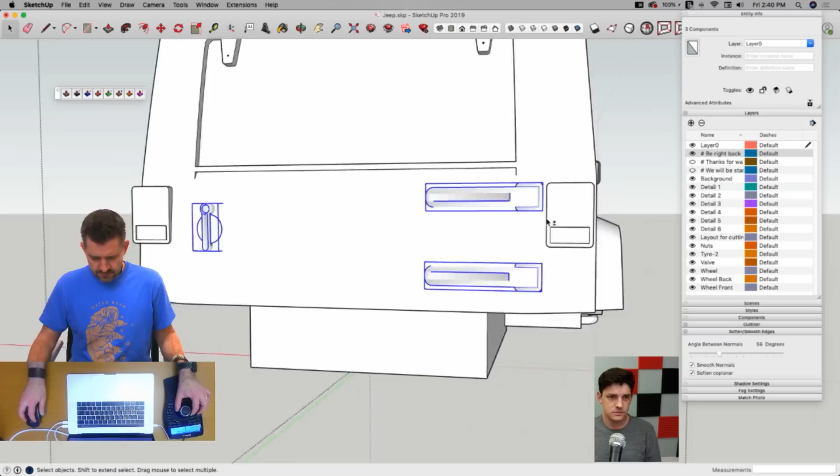These pieces never intersected the main body, so I'm gonna grab that. It should be four components. I'm going to group them together, go into that group, select everything, and explode it. Then I'm just gonna do some quick intersection on the back to get that joined to the main body.

Let's see, these both come far enough in. Pull that down a little bit so I don't have that same intersecting-with-the-face issue I had before. All right, and I'm going to grab this. Intersect face with selection.

And then I can... everything's so softened. Oh, this is actually a cup, this is the inside, like that side of it. Woo, you have me tricked, Jeep.

Jeeps are a classic trickster, that gets me every time. Arcane trickster.

All right. When you have stray geometry, actually I could leave that geometry there. I could actually just let intersect pick it up later.

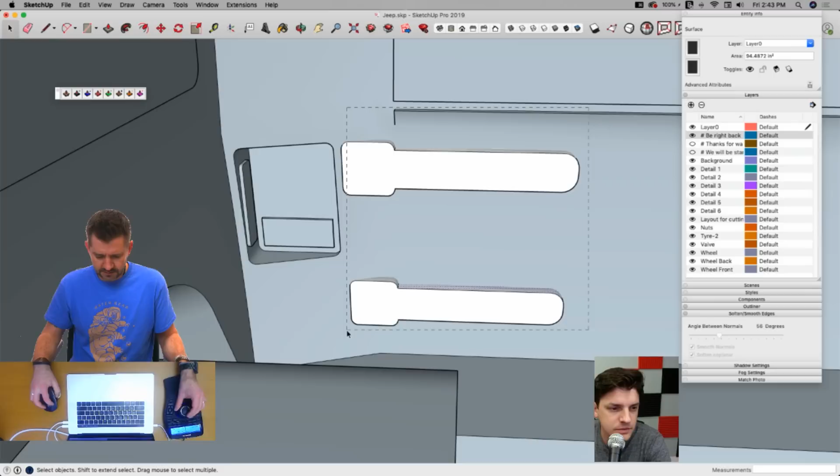Yeah. All right, I'm gonna grab all this. One last intersect, well not last, on the body. Intersect with selection, delete, delete, delete, delete. Extensions, cleanup, erase stray edges.

Check for solid, all right, got a couple. Whoop, teeny tiny. All right, I'm gonna go ahead and guess that there's another one right down here. No, was it flipped? Nope. All right, check again. Oh, three reverse faces, fix it, good to go.

All right, now our body's done. Explode this again, trying to unnest some stuff here. All right, you gotta leave the nest at some point, you know? I've heard tell.

All right, I'm gonna grab this and cut it. I'm gonna paste it out, oops, edit, paste in place, to put that group, the bumper group, outside of the Jeep altogether. So now I'm on the outside, and here I have one, two, three, four, five, and did I put inside?

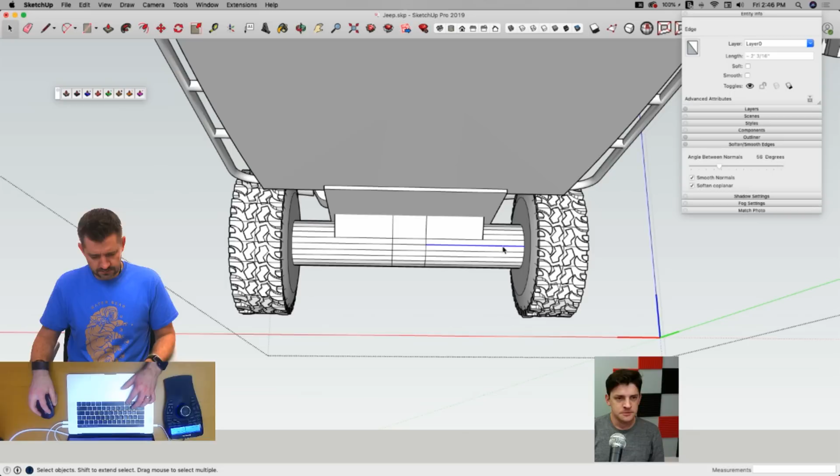My tires aren't the same dimension out. See that? See this gap? This is different on both sides. Not a lot, and when I shrink it down, it's not gonna be a big difference, but I'm gonna try to get it closer. I'm eyeballing it. All right, we'll take this one too. Actually, these two look closer.

All right, is that block in the middle of the Jeep? Oh, that is an excellent question. Let's see. One and fifteen sixteenths... one five sixteenths, yeah.

I spilled coffee all over myself. I won't tell. Thank you.

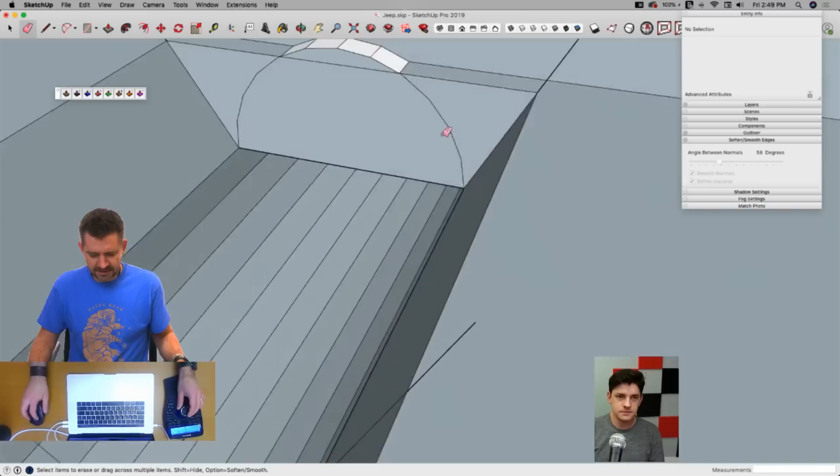Grab it all, intersect faces with selection. Again, triple click, delete, delete. Alright, just about there, see the end of the tunnel from here. Alright, well, one more time, clean up - actually, probably not the last time.

Get rid of our stray edges again, I should say. And then we got this thing right here. This is actually pretty easy - select all that and this, right click, intersect faces with selection. And it's taking a while because I again grabbed the entire tire and all those little nubby geometries, so I just asked it to do a lot more than it probably should have. So, 2.5 seconds lost there.

Every little bit counts, it all adds up. Oh, you're supposed to say don't worry about it. That was - take a penny, leave a penny. Don't worry about it. There we go.

All right, that looks pretty sweet, but it's distinctly missing bumpers. This corner I cut down here wasn't so bad when I had bumpers on there, and then I lost my bumpers, and now it's not as cool. Much better. Yep. So, what do we got?

We're at 3 o'clock, so I'm gonna set myself a time limit. I'm gonna give myself half an hour to get this bumper clean enough to attach. That's my thing. All right.

So let's see, what do we got as far as pieces? Cool. All right, so this right here, gotta clean up these vents.

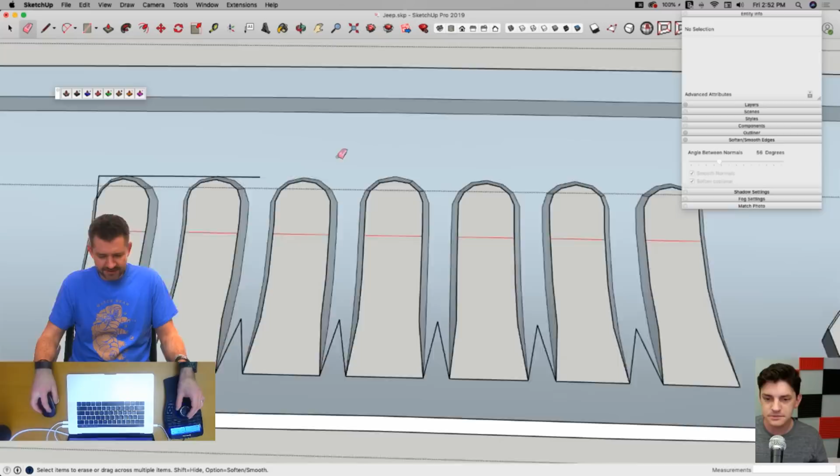Let's use Curviloft to clean this stuff up. I'm gonna get rid of my extra geometry, and I'll have to loft a couple different times because each one's different, but I'm kind of okay with that.

I think what I might be able to do to speed this up is over-soften it. Why are these not softening? Oh, because they're just geometry floating here. Now we're talking. Softening is kind of cool because it'll temporarily get rid of those edges, so when I select my sections for lofting, it's quick and easy to just grab that outline rather than pick all the edges.

Mark, bopping in for a quick view before locking up for the day.

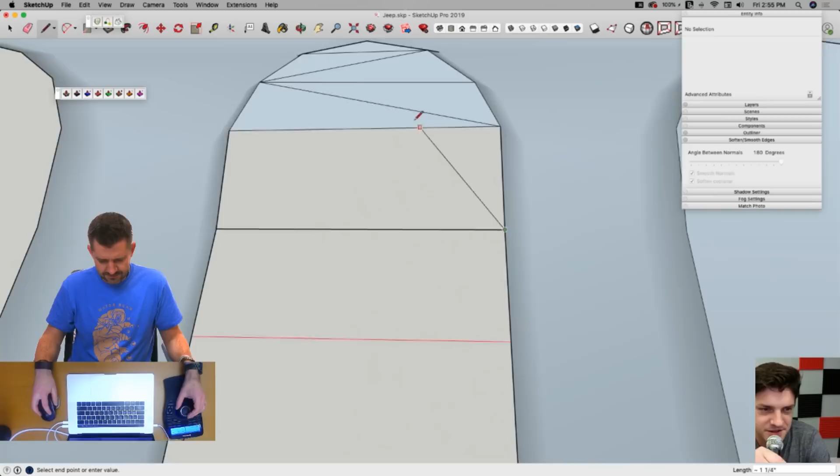Oh, this is... you always say there's something therapeutic about stitching. I do like it, I like it less when I've got a timer going. But yeah, honestly...

I'm really trying to think of a way to shortcut this and make it simple to close up, but I can't think of any better way than to just do this. I think I'm gonna see if they're symmetrical to the other side, so I might be able to grab these, just do half of them and copy it over. If not, I might cut the whole thing in half and mirror it over, which would be good because if I can get half a solid, that'll save me some time too.

All right, and one more - one way or another this will be the last one. Somebody suggested instead of selecting first and then using Curviloft, use Curviloft first and then select. I don't know if that works - I believe it sees the same geometry, but I could give it a shot real quick. Never hurts to try.

Entities created by others may be speed drawn, with no consistency, just for representation, etc. Yeah, and that's what we're saying - depending on what this was used for, this may have been good enough, but I'm not going to argue with what you're saying.

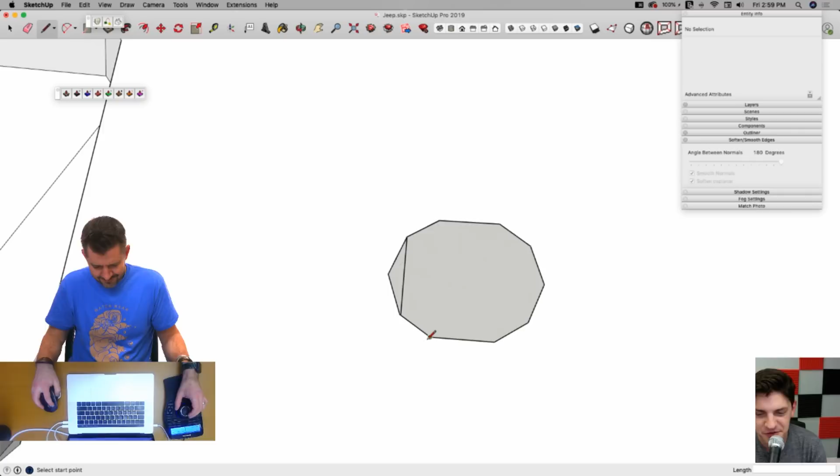This person says, Aaron, I feel bad for you, man. Treat yourself today with a nice long drink afterwards. I could actually think of a lot worse things to do right now, you guys. I know, it's part of my meditation. I'd rather be hand stitching than doing... that's right, it's not too bad. I can think of worse things to do. That's what I'm saying.

Working with somebody else's models is not the ideal situation, obviously. But I will say that if I had to draw a Jeep from scratch, it would probably be more work than what I'm spending right now. So I guess that falls into the...

What's your mindset like? Is this like a headlight or something? What is that, I don't know. It's like a screw hole or something. It doesn't exist in my world. See? Gone, okay. Get in there, get in there.

All right, tow hooks. No, tow hooks are too small, we don't need those. All right, so these pieces are good. Now I've got to close it all up. I'm just going to grab...

So deep into everything, so many groups. Oh, let's do this too.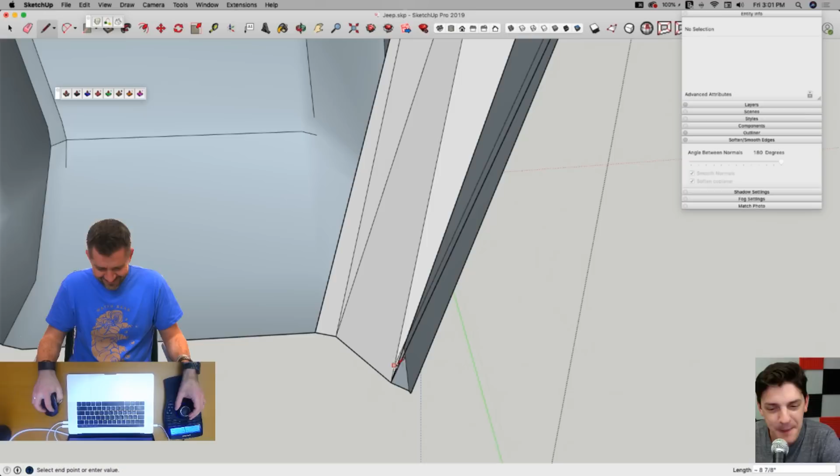All right, and I don't care about that. Nor that.

Devin over on Facebook says, Step 1, delete anything you got from 3D Warehouse. On occasion, it seems like in the case of the hubcap, yes, that's exactly how it worked out, man.

All right, I've got to turn on my hidden geometry because I can't tell what I'm... Holy cow, look at that mess. All right, let's see if we can simplify that. Oh man, seriously?

Hey, this would be a great place to loft, if it'll work. And this is just a rectangle, so that can be triangulated, right here. Quick stitch might work.

How am I on that half-hour timeline I just set? Well, that was at 2:50, so you're about 17 minutes left. Oh sweet, I got this, don't you worry also about it. Whoops, you did say, well, it's about 3 o'clock, and it's now 3:03. So you're holding my rounding against me?

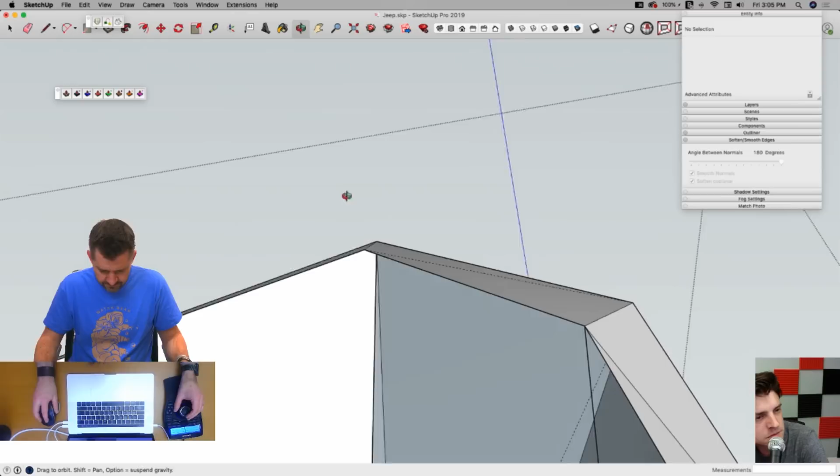The nice thing, again, and this is specific to this particular use case, is that when I'm 3D printing, I'm not really concerned about small geometry. Oops, I don't know why I connected right there. So stuff like this ugly stitching isn't going to matter once I get down to the size of the model I'm talking about.

All right, so I've got a couple more pieces. Actually, use scale to bring this back in so it intersects. And then I can take these two pieces right here.

Could you make a stream showing the Artisan tool? Have you ever used Artisan? A little bit, it's been a while, to be honest. I was actually talking today about Mindsight Studios, the company that makes Artisan. Dale Martens is over there, and I've always said, if it comes from Mindsight, it's a solid tool and it's good. I got into more organic modeling early on, got into the sub-D workflow, and I just kind of ended up using that more than Artisan, nothing wrong with Artisan. It would be interesting, I should learn up on it myself, and maybe we could do an Artisan and sub-D comparison, not versus. That would be kind of cool. Yeah, thanks for the suggestion, we'll add it to our list.

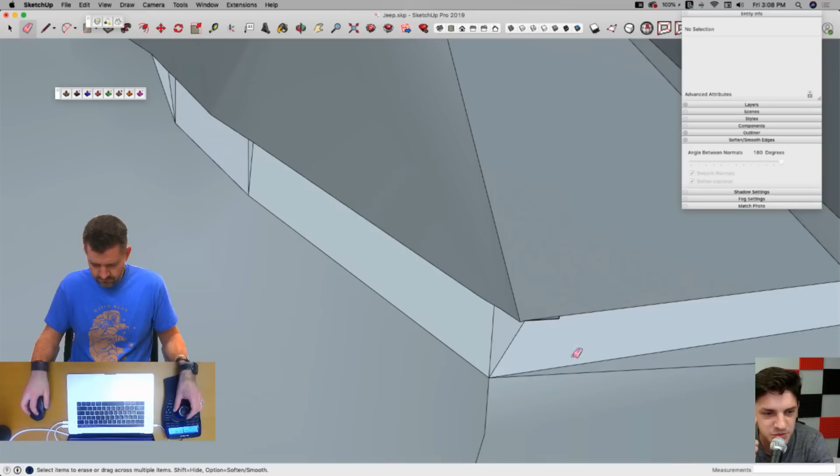I think the kind of modeling Aaron's doing right now is because of the existing geometry that came in from 3D Warehouse, so this isn't how I would normally workflow or model it. But for what we've got right now, this is what's being done to clean up existing geometry.

He's using a mouse - a 3D mouse, the 3Dconnexion SpaceMouse Enterprise. You don't need to use that tool, but it's a little nicer for orbiting when you're presenting to people, like on a live stream. A little smoother, and you can jump inside geometry quickly, as you just did.

Oh guys, we are so close. All right, so I'm gonna take - what is this mess right here? I don't like this.

Is there a possibility for plugin creators to do a joint stream? Yeah, no, absolutely. The streaming thing is definitely something we've been doing for a little bit, but we're always looking to improve and do different stuff. So yeah, it's definitely a possibility to have somebody else on the stream, or doing the stream instead, or something like that - certainly something we're open to doing. There's not any particular roadblocks for why we haven't done that yet. Just haven't done it yet. We've only done it a handful of times, so just haven't done it yet.

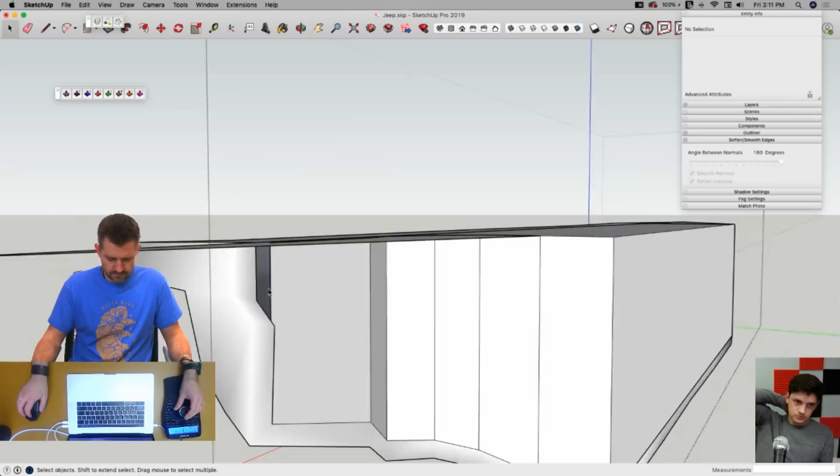All right, that's closed. Intersect this. Not quite sure what's going on down here. Oh, it's closed, who cares. Should probably put a shortcut on Push Line here because I'm using it so often. I'm kind of feeling, as I'm doing this, that maybe some of this geometry was a little arbitrary just to get everything to close up. I'm going through here looking at some of the stuff that I don't really know is that important - that piece is right there.

All right, so I'm gonna grab one final chunk here.

Anna says, Aaron, if it makes you feel any better, I'm cleaning up typography in AutoCAD for a name, cutting on a thick wooden plank for a baby shower - years of architecture for this. There you go. I'm sorry to hear that, that does not sound like a great time. But all right, it's good - it's good we're hanging out together then.

There we go, and this will yield a solid.

Why is SketchUp stalling in developing new built-in tools? We did not see any improvement for years in the modeling tools, I feel. Yeah, I think SketchUp has a base set of tools that are sort of tried and true, and a lot of the extra stuff comes from extensions. A gentleman earlier today compared SketchUp to a smartphone, with extensions being the apps you install. So getting it to do exactly what you want can be helped along by extensions - we've talked about organic modeling or bringing in external stuff, there's a million things extensions can do. We definitely try to keep the base software simple and easy to learn - that's one of the things that makes SketchUp special and different from everyone else. So yeah, that's what I'd say to that.

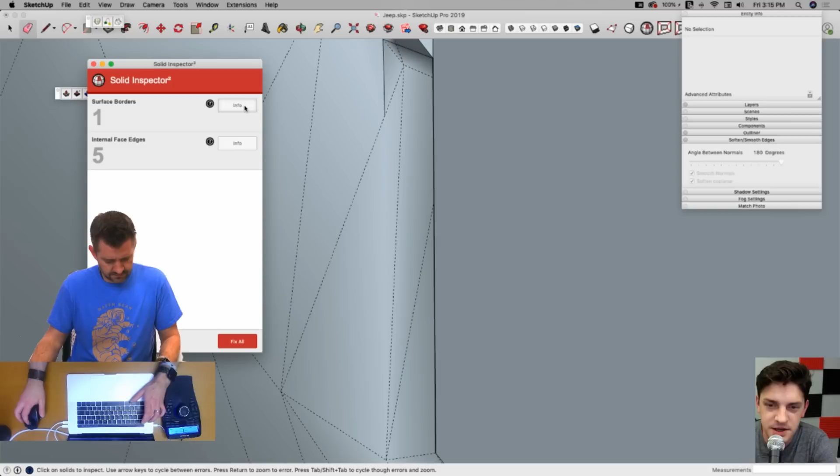All right, anybody out there got plans for the weekend? What are you guys doing? Over here we got 3:14 p.m. Friday afternoon. We got a long weekend coming up, so some of you folks must be in the actual weekend itself. Do you have any particular plans? Doing anything fun?

I don't, but I'm sure something fun will happen. I'm optimistic of that. But what about you guys? Seeing any films? Are you enjoying the great outdoors? Are you doing anything otherwise? Work? Okay, that's a shame. I'm sorry.

Hey, if you like your job, work's not so bad. Do you like your job? Yeah, work can be fun sometimes. Unfortunately, working 7 days a week. Yeah, that doesn't... that sounds less fun.

I'm sorry, I feel your pain. Sort of, except you don't work 7 days a week. Right, I can feel it without doing it. I sympathize, I think that's where sympathy comes in. Sympathification. Bummer, that is a bummer.

Weekend plans: rendering a large project. Kids at Scouts, so we get to sleep in on Sunday. Nice, sounds like a win.

Exciting, like that. Are you planning streams with architectural models? Actually, our plan for next week, as of now, is to model a deck. It's not strictly architectural, but we're going to model a deck for my house - well, not put the actual deck on, just model it. So you guys come by and help me design that. That would be awesome.

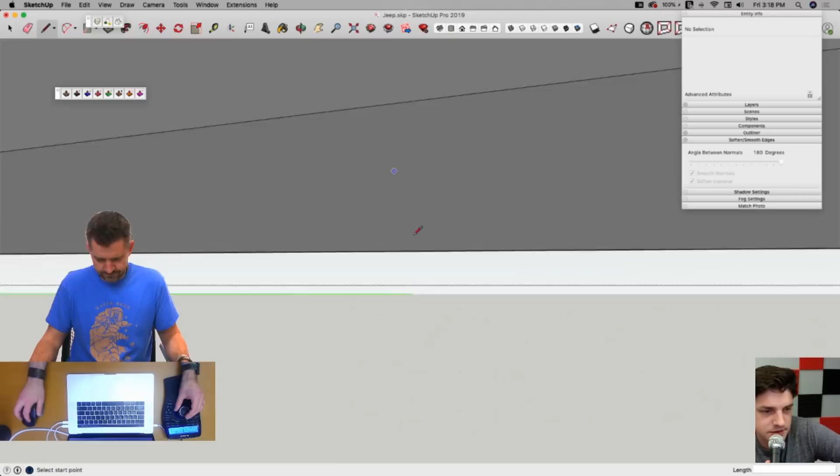Yeah, I got some birthday parties, it sounds like. That's good then. Hey, parties are always great - celebrating another year, another trip around the old sun. Enjoying the air conditioning. Ooh, that's nice too. I'm definitely more of an indoor person. I can get outdoors, you know, but I like the cool, crisp conditioned air. AC, good stuff.

What the? There we go, all right. Solid. There we go. Solid. No, what? What? You're ruining my big reveal here, whatever it is that's causing this problem.

Are you going to use John Brock's modeling techniques? You could come up with a material cost at the end of the live stream. That could definitely happen.

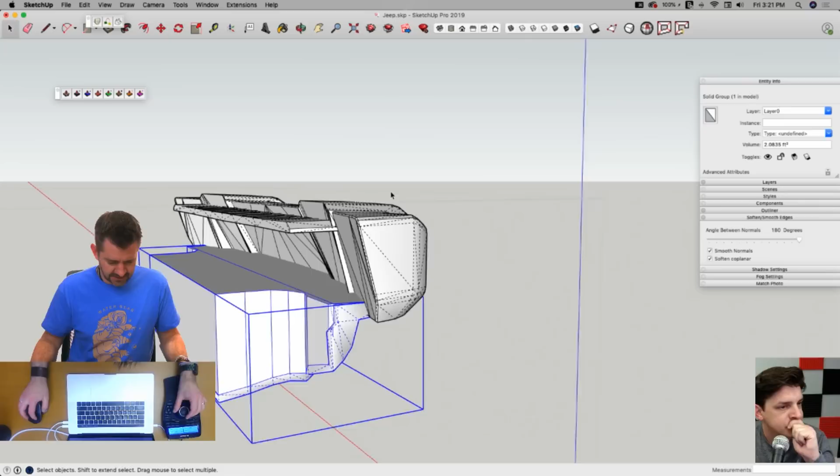But yeah, maybe... John's a giving guy, maybe he'll hook us up with an estimator for SketchUp. But to be honest, I will probably keep it a little simpler than that, because honestly this deck's not going to be insanely complex. But I do want to track how many pieces of what are in there, so something will happen as far as tracking materials and coming up with a high-end estimate of what it'll take to make the deck.

And as we have hours to do it, I think we'll probably end up with a much more elaborate deck than I'll actually build on my house, but, you know, it's good to dream.

You can do like a slide or something in there. Or some kind of jungle gym. Ooh, I like that, start the idea list. I always thought of myself as an idealist. How about... that's another really good suggestion.

How about texturing badly textured 3D warehouse models in a future stream? It's like sort of retexturing or... yeah, we talked about, oh, son of a gun.

I think I just joined too much stuff together. Where'd you come from? Get out. All right, there we go.

We talked about doing the live stream around materials earlier, which I think would be pretty cool. I think that would be a fun thing to take a look at.

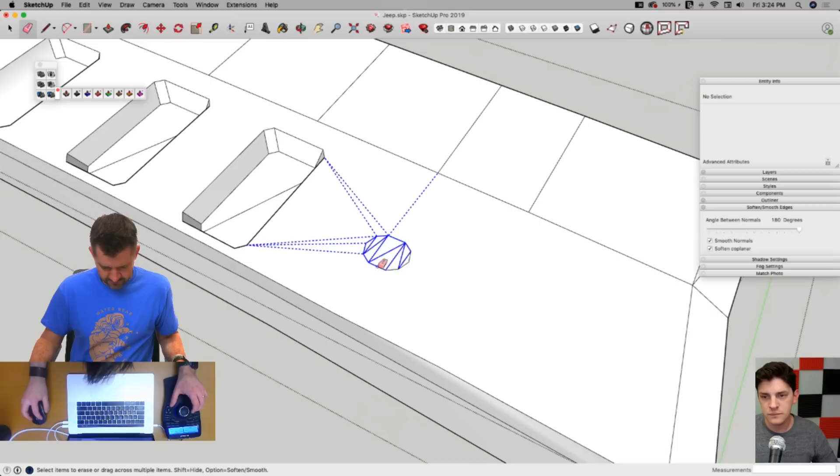What will the scale of this project be? Are you doing it to a specific scale, or just scaling the whole thing down to like a couple inches long, whatever fits on the build plate? I'm not going to - again, we're modeling this model really pretty close to like full size.

Why are you saying it's good? All right, I'm going to explode it. I'm going to make it a component.

Let's see if that - top 10 must-have SketchUp plugins, yeah that's a good one, sounds like a good blog title or something. Yeah, I know Justin Geis of SketchUp Essentials has a couple of those kind of videos on YouTube, so you can check that out for suggestions on best plugins.

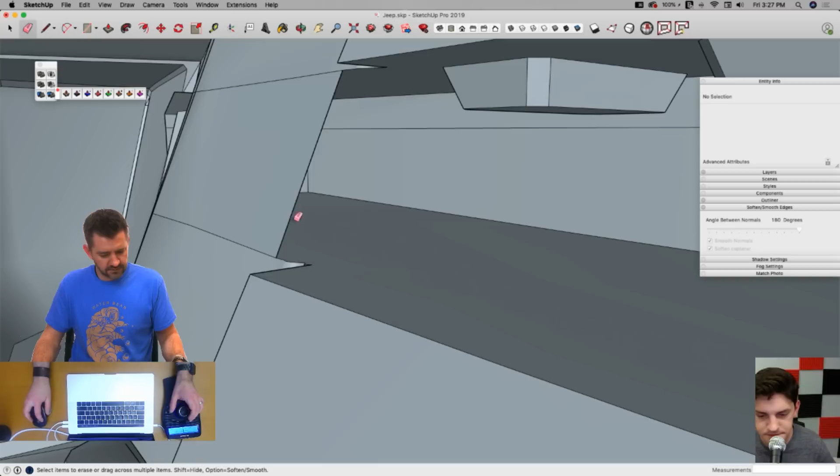Weld, cleanup, solid inspector, bevel - I don't know if I've ever heard of just straight bevel. Have you heard of that? No, is that an extension? I think so. I have not heard of something called just bevel, not to say it doesn't exist. Like I said, it's really hard to keep on top of extensions.

I hear typing, I'm assuming that means Matt is looking. I looked up bevel and it came up with round corner, so perhaps that's like a setting on round corner that will... Yes, you can choose bevel there. Bevel is one of the settings on round corner, or on Fredo corner - excuse me, used to be called round corner, now it's called Fredo corner.

You mean Shado corner? I'm not calling it that.

All right, I refuse. I have the front bumper done in less than half an hour. Wow. Hey, you said that at 2:50 before 3. How's that before 3 hours? Wow man, tough crowd, tough crowd. No, I think you did a great job.

All right, so now we're getting to the mocking part of the stream. That's right, welcome to the attitude.

All right, I'm gonna bring this out. It's just a skoosh.

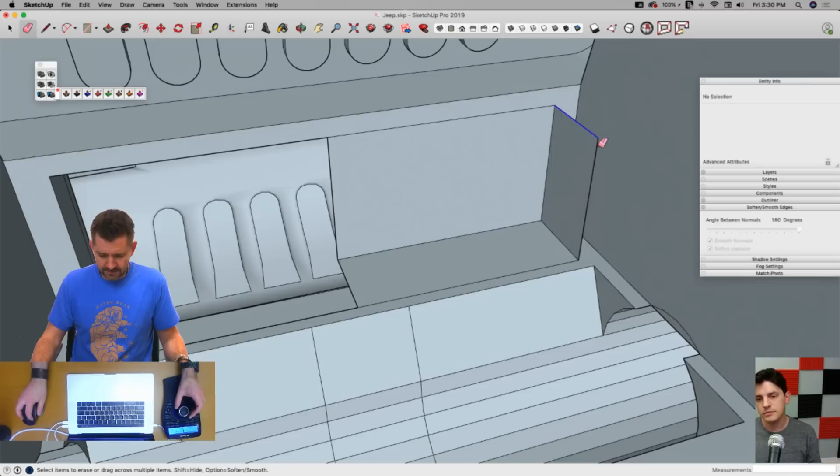So again, at this point I don't have the rear bumper on there, I know, but Matt wouldn't let me. Sorry, guys. I'll take the blame. All right.

Solid Inspector, let's see what we got. A couple of stray edges, interior faces. So I may go back in and get the rear bumper on before I really send this to the printer, but the step to do at this point would be to take this.

I'm gonna make a copy of it, I always try to maintain my original if I can. Grab that and then start scaling down. So I can arbitrarily just start scaling it down, or if I know a dimension I want to use. Say I wanted it to be 3 inches, grab the front here, hold down Shift to uniformly scale, and start dragging back like this.

Then I can release both the button and the Shift key, type 3 inches, and hit Enter. What that did is it scaled uniformly the whole thing together so the front handle to the back handle is exactly 3 inches. So whatever the furthest out point on the front is, somewhere around here, to the furthest point on the back, that's here-ish, is going to be 3 inches.

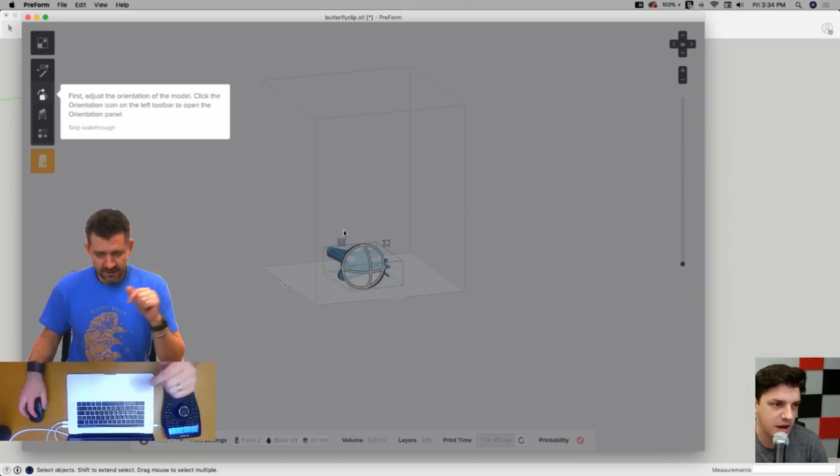The treads on the tires are too small for the 3D print? Yeah, I don't know, they're going to be small. I'll print this at fairly high definition.

So we'll see, we'll bring it in, you guys will see exactly how it turns out. So I'm going to come in here and open the desktop Jeep STL, bring it in. It does its own little thing there. Oh, look at it, so cute.

I'm going to, so one of the things, and I don't want to spend too much time on this because this is Formlabs software, so I don't want to beat this to death, but it's going to orient it in the direction it sees being best. That's gnarly. If you ever end up in this position in a Jeep, something went wrong. Sometimes they have those upside-down stickers that say, if you can read this, flip me over, or something like that.

I'm going to maybe take this and scale it a little bit larger. Ooh. Oh yeah, that's good stuff.

And then I'm going to generate support based on the default settings. Does it show the support? I haven't used one of these in a while. Yeah, this is pretty cool software. This is specific, this isn't a third-party application. This is the specific slicing software for the Formlabs printers, and it has all the stuff built in there, depending on resin information, that kind of thing. But it'll actually go through, like I said, it'll orient it to the way it's going to print best, and then it'll automatically create, basically, a tree kind of thing that's going to come up and support it.

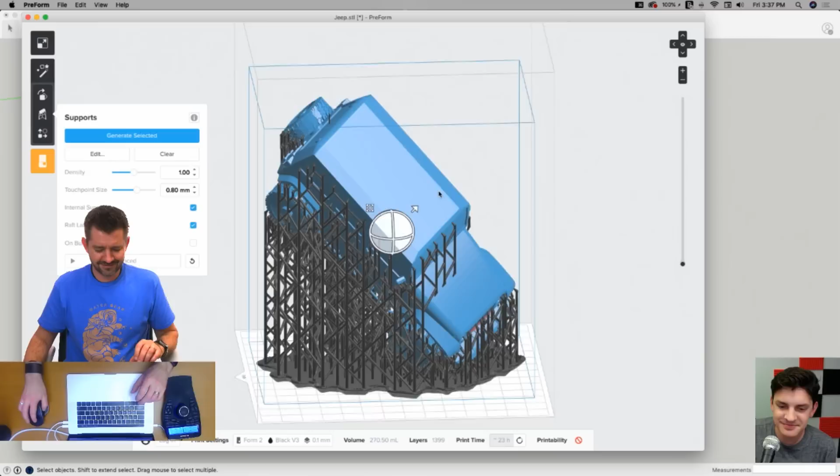So that kind of, we're there. We made it, we made it to here. Yeah, I think that's good progress.

It's a terrible place to be if you're actually in a Jeep, though, because you would actually be upside down and inside of a resin. That's true, that would be rough. But yeah, I'm interested too, that's a good question to see how much detail the printer can keep for that right there. That'll be fun.

Deck, like a backyard wooden support deck. Where you, I don't know another term other than deck. Yeah, not a part of a ship, like a patio, but a deck. Yeah, a patio made of wood. Isn't a patio made of like rock or brick or something? Yeah, concrete, yeah, I don't know, there's probably an official term somewhere. A wooden patio, a wooden outdoor floor. Something along those lines. Dock, a dock has an O. A deck has an E. I don't know sign language. What was this, this is an O? It looks like an E to me. See, look, see? Got it. E, yeah, it looks like one. Sounds like Friday afternoon, Friday.